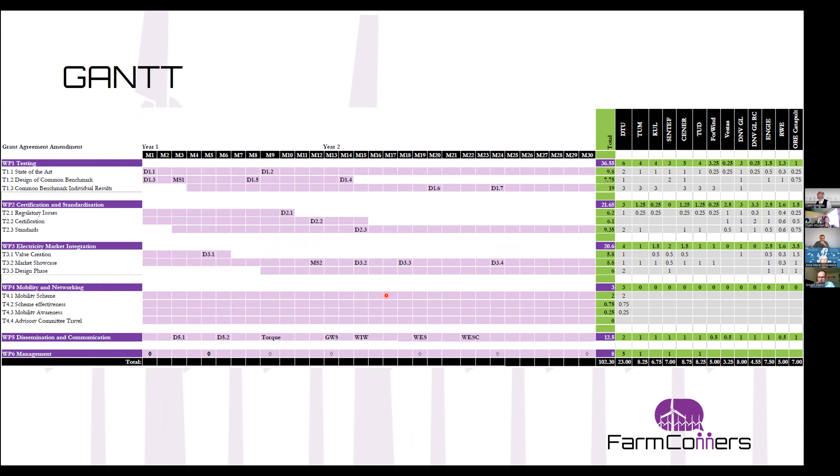And the first contract amendment had some extra tasks, but we already discussed those earlier. So we had this kind of a final Gantt chart, and what you can see is that here at the very end of the project, we really don't have that many deliverables. I think we pushed out one or two of the deliverables to the very end, and we'll be hearing more about that in the near future.

So the narrative at the beginning was that wind farm control had been a research focus for a long time, and we've been trying to discuss how to actually get that a bit more into the market and how to pave the way for wind farm control, and how to also have some particular wordings a bit more defined that we didn't really have in the beginning.

So we had most of the people we knew that had been doing wind farm control in the past. We also had some advisory committee that we, in the end, really didn't use too much, except we invited them to the meetings that, as you know, weren't really that easily possible anymore after the start, which is obviously a shame for something that is a project that is determined or is made to actually convene people and to talk to people.

We had this layout of tasks and work packages, and the promise was that we came from a relatively low TRL to wind farm control at TRL 7. Whether that actually was true or not can be discussed later on in the final discussion.

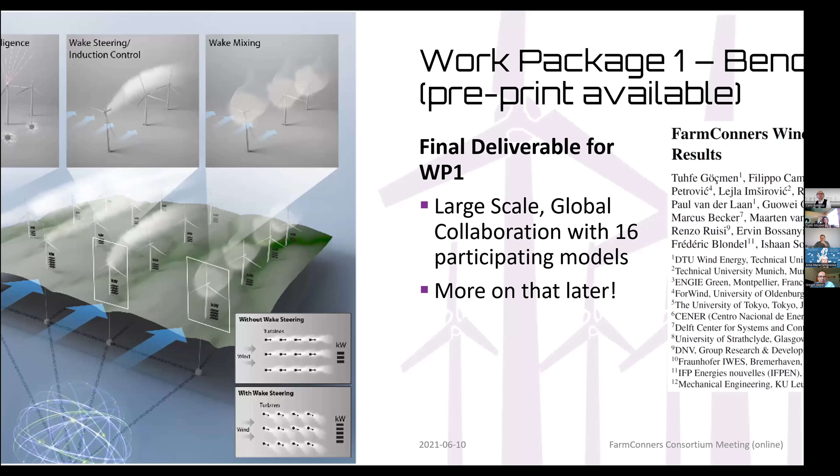There's also the benchmark results where we have a preprint available, and that's also a final deliverable for work package 1. Again, those are all teaser slides and shall be discussed in much more detail later on.

We also had certification and standardization already in Outlook, which I think is a bit of the way towards the higher TRLs, to be known that we already have some products and some ways to certify those products.

And there's also the market showcases that obviously are some of the particular activities that we did in FarmConners. One of the things coming up is also this open access controller and the wind farm, looking into how to do the flow control and the power plant control together.

And as an outlook, as I said, FarmConners is not the end of the line, it's not the end of everything. Wind farm control is a big topic and will only grow in importance in the future.

And one of the things that is coming up now is the Awaken project in the US. It's notionally the largest ever project on measuring flow in wind farms and in large wind farms. And they also have a wind farm control component.

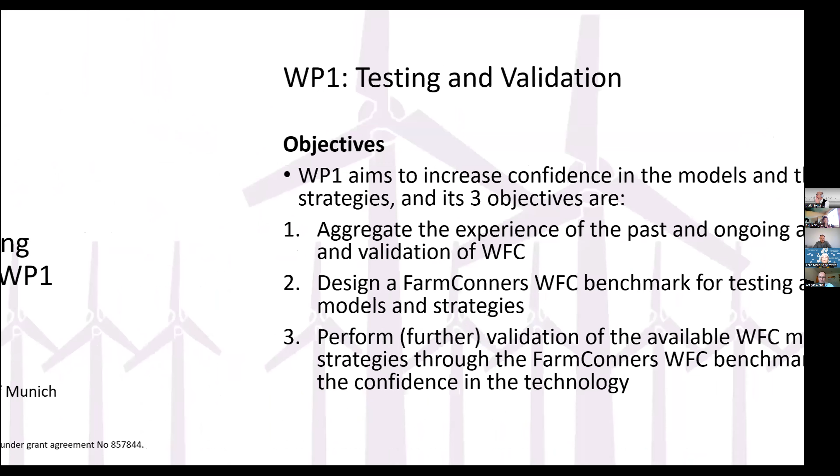I would like to give a short update on the overall outcomes of the work package, and then we will look at the results for the benchmark. So just to summarize, these are the objectives of work package 1. The overall objective was to increase confidence in the models and in the control strategies, and we identified three objectives: aggregate the experience of past and ongoing activities concerning the testing and validation of WindFarm control strategies, design a benchmark, and perform further validation of the available models and strategies through the benchmark so as to increase confidence in the technology.

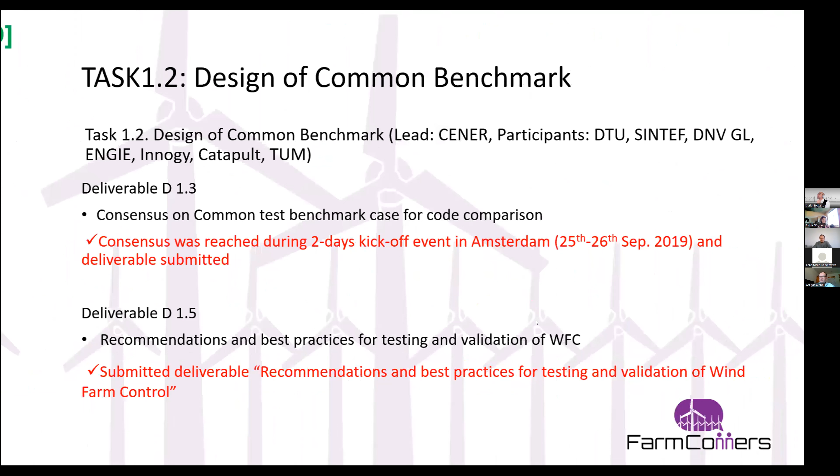We defined several tasks. The first was establishing the present state of the art in WindFarm control testing and validation, with two deliverables: a workshop, and an analysis of the research gap published in a paper presented at TORQUE 2020. Then the second task was designing a common benchmark. First we had to reach a consensus among us, among the consortium, and that was also a deliverable, along with recommendations and best practices for testing and validating WindFarm control strategies.

We then launched the common test benchmark. This was done via a webinar. It was supposed to also be presented at TORQUE live, but due to the pandemic, since TORQUE was postponed and then went all online, in the end we decided to anticipate the launch of the FarmConners benchmark through a webinar. The overall goal of the benchmark has been described in the paper published at TORQUE 2020.

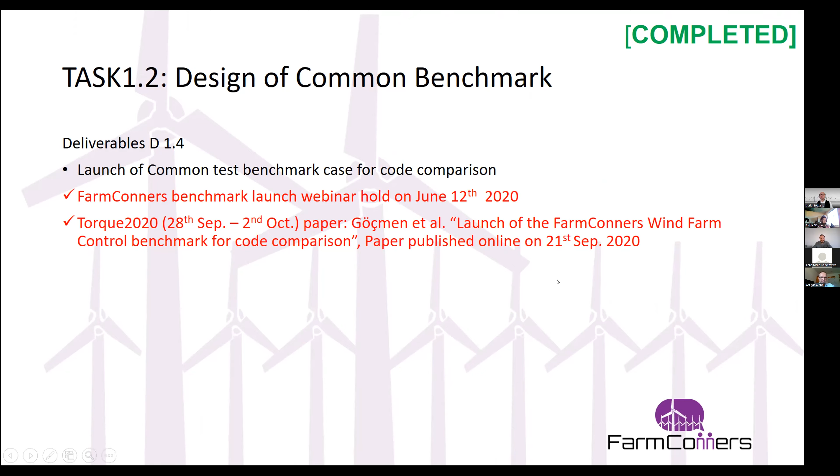Finally, the last task was the benchmark itself. What we wanted to do was validate models against the FarmConners database, which consists of high fidelity simulations, wind tunnel experiments, and field tests. We wanted to use the database to quantify and reduce model uncertainties, and we expected to see a convergence toward those wind farm control methods whose benefit can be relied upon based on model predictions. Finally, we wanted to present the results in a journal paper to be submitted to Wind Energy Science.

Indeed, we had three benchmarks within our common benchmark: one based on a synthetic data set, large eddy simulations generated within two European projects, TotalControl and CL-WindCon. Then we had a wind tunnel data set benchmark, based on wind tunnel experiments conducted during the CL-WindCon project. And finally a field data set, coming from field experiments. In this case, we used data gathered within the framework of the SMARTEOLE project, a project funded by the French government.

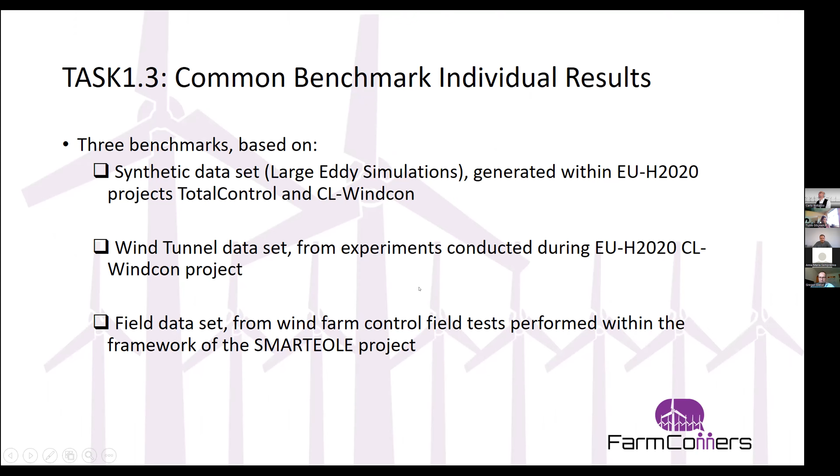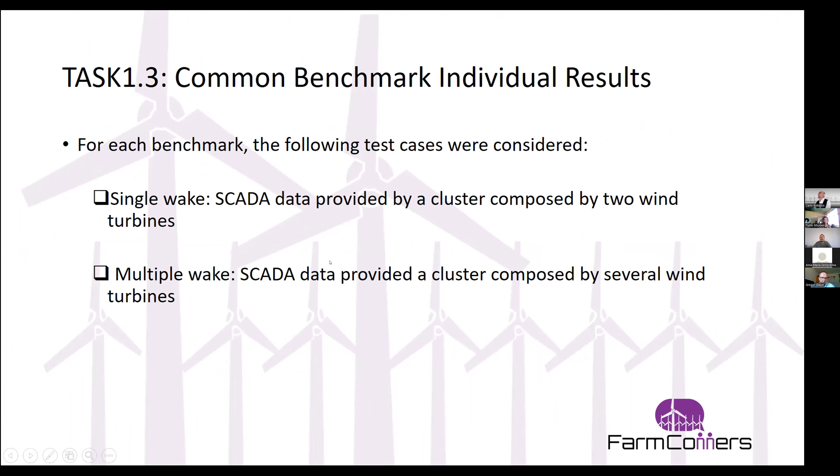For each of these 3 benchmarks, we consider 2 cases: single wake and multiple wake. Single wake basically uses SCADA data provided by a cluster composed of 2 wind turbines, and multiple wake is SCADA data provided by a cluster composed of several wind turbines.

In total, 13 participants submitted results. 5 participants worked on the field data set, 4 participants on the LES-based data set generated in CL-Windcon, 5 participants on the LES-based data set generated in Total Control, and 2 participants for the wind tunnel data set.

Some results were presented first at the Wind Energy Science Conference of 2021, again online in this case, and this is also deliverable 1.6. Finally, we had deliverable 1.7, about publication of the results from all 3 benchmarks I just talked about, in a journal paper.

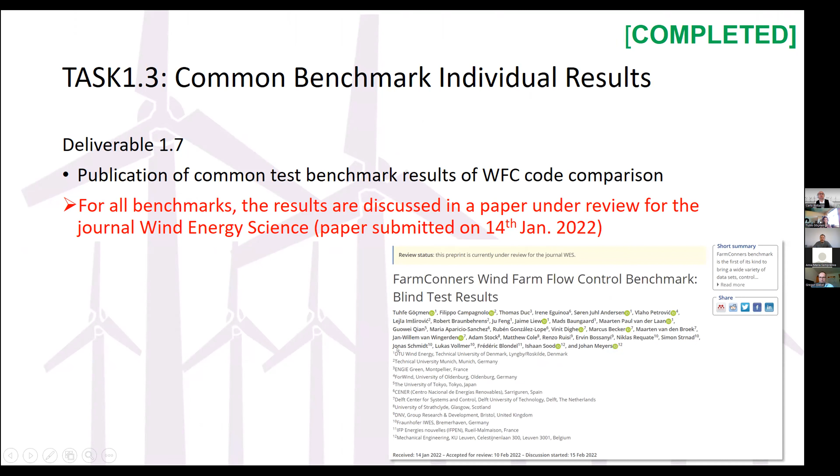We submitted a paper to the journal Wind Energy Science. The submission was on January 14th of this year, and now the review process has started. We expect it will be reviewed in the forthcoming future, and hopefully finally published in a matter of a few months.

Finally, last summer some tasks were added to the project, also to work package 1, as the entire project was extended, and the task that was added is task 1.4. It is about prospects and challenges of wind farm flow control. For this task, the goal was to write the review paper that Gregor just spoke about.

It's a paper composed of 55 pages, 6 sections, more than 300 references. It's currently out for friendly reviews, but it is expected that it will be submitted again to Wind Energy Science in a matter of a few days.

So this is just an overview of the objectives, results, and deliverables pertaining to work package 1. Now I would like to invite Tuhfe and Thomas to also provide more information about the benchmark results. Specifically, Tuhfe will talk about the benchmark results based on LES data, and Thomas the benchmark results based on the field data, while at the end I will also present benchmark results based on wind tunnel data.

So I don't know who, Tuhfe and Thomas, who wants to start first. Feel free. I don't know, field tests are always more interesting. Thomas, would you like to give it a go first? I can go first. Yeah, thank you.

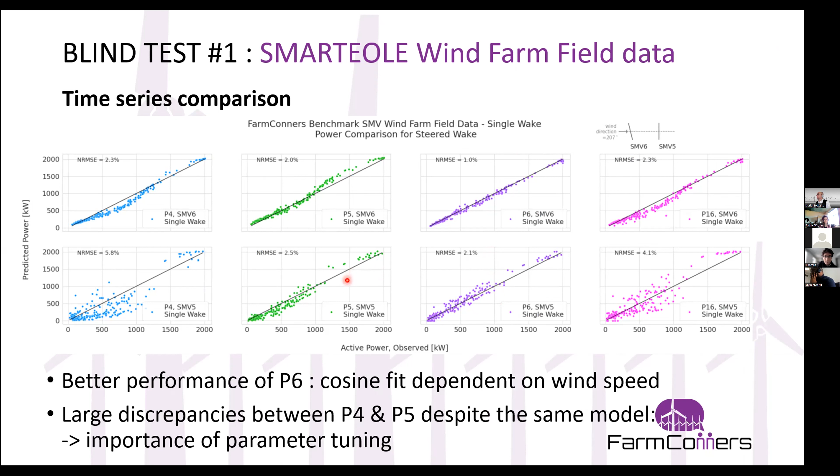P6 is also the one that behaves best at the downstream turbine, but P5 is also doing quite a good job.

Now, talking about the evaluation of the different models: we had these two sectors defined for multiple and single wake. I'm going to discuss only the single wake cases. The pre-processing of the SCADA data was a bit difficult, mostly because, since this is field test results, we do not have a reference signal as the atmospheric condition is changing constantly.

So we had to use the SMV7 power as the reference signal, since this is the only turbine not affected by the wake steering. Although this turbine is very close to a forest, and therefore the wind that arrives at SMV7 is not exactly the same as the wind that SMV6 experiences for the full wake condition considered in this exercise, we had to apply some recalibration on the SMV7 power signal so that it could be used as a proxy for SMV6 during the wake steering exercise.

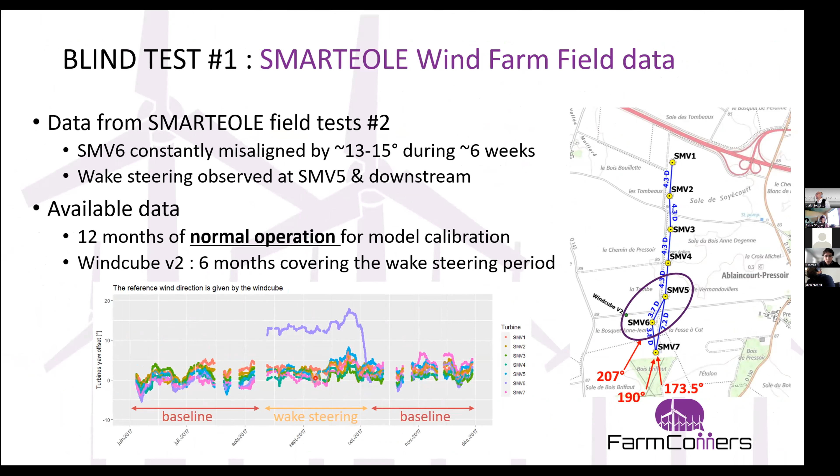The second problem with this field test is that we didn't have any toggling between the wake steering and baseline periods, so we had to use a baseline period that was both before and after the wake steering period, and therefore there might be slightly different atmospheric conditions on average between the controlled and baseline periods. We tried to make sure these differences were not too significant, not preventing the analysis of the results, and we think the way we applied the post-processing was the best approach for analyzing the results.

So we estimate the results using the energy ratio methodology that was defined by NREL. Basically, you use the reference power signal to normalize both the upstream and the downstream power signal as a function of wind speed and wind direction. That's what you can see here for the single wake case, either as a line plot or box plots for several bins.

In red is the baseline operation, so the baseline wake combined SMV6 and SMV5 power as a function of wind direction. In black is the same, but during the wake steering test. You can see that since the black box here is above the red box, we do have an increase in the combined power production of the turbine.

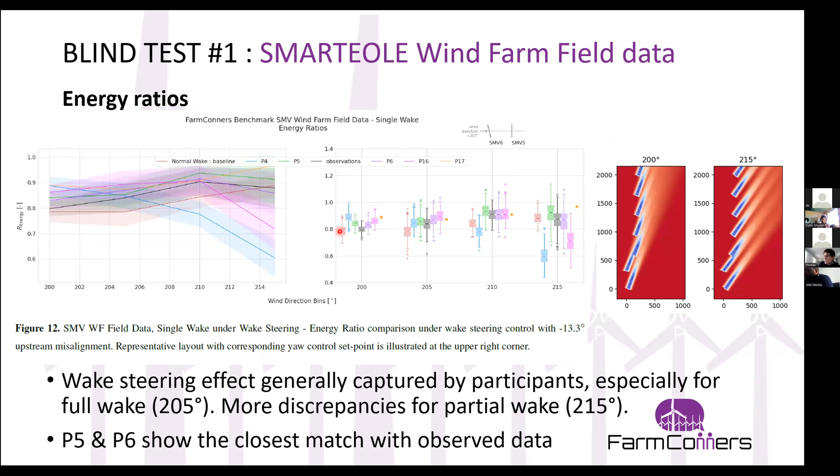Finally, we could also estimate the energy gains. The energy gains are obtained by dividing all those results with respect to the same baseline here in red, and they are also expressed in terms of box plots. The conclusions are more or less the same as the previous graphs. In general, P5 and P6 are the ones most able to capture the energy gains observed on the SCADA data, and P4 shows big losses in power production above 210 degrees.

This is probably because their hypothesis on the yaw loss exponent of the upstream turbine is a bit too high, so there is too much power lost on the upstream turbine, and the downstream gain in their model does not compensate for this loss. On the other hand, for participants who estimated a much lower loss at the upstream turbine, there seems to be much closer results to the actual wake steering case.

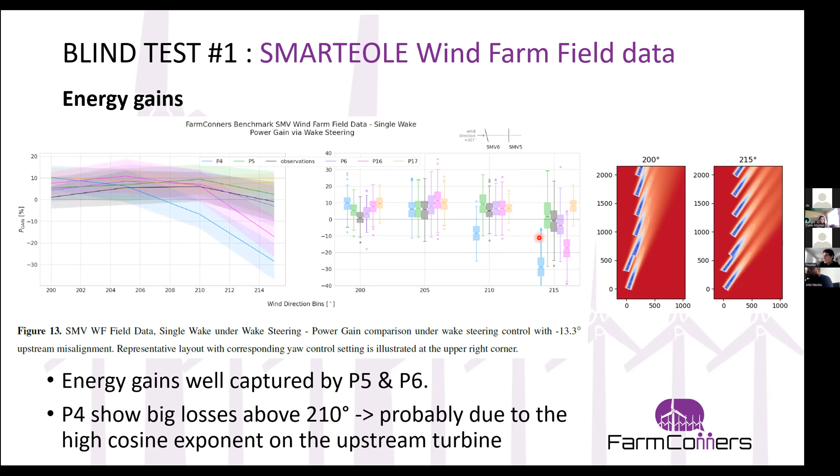So finally, some conclusions from this benchmark exercise, maybe 3 major points we highlight in the paper. First, there is a very high sensitivity to the choice of the model parameters. This can be seen by comparing P4 and P5, who are using exactly the same model but with a different tuning strategy - we observe very different results in the wake prediction. In particular, the yaw loss cosine exponent seems to play a very critical role in this estimation of energy gains, so this might be the parameter that needs to be calibrated the most accurately.

I want to point out that there was no wake steering data to calibrate the models for the participants, and I think this was very problematic for them, because they had to take hypotheses about both the yaw loss cosine exponent and the wake deflection model. Some of the participants did a great job calibrating those models without wake steering data, but for others it was more difficult to get good results.

Using these first 2 points, we also concluded that for future field implementation, it would be easier to follow an iterative process, because at the beginning we are forced to use normal operation data to define a first wind farm control strategy, but we have no assurance that this strategy will be the best one. After a few months of wake steering implementation, we could probably update the wake model parameters based on the field data collected, and then adapt and adjust the wind farm control strategy to get to the final and most efficient strategy we can achieve.

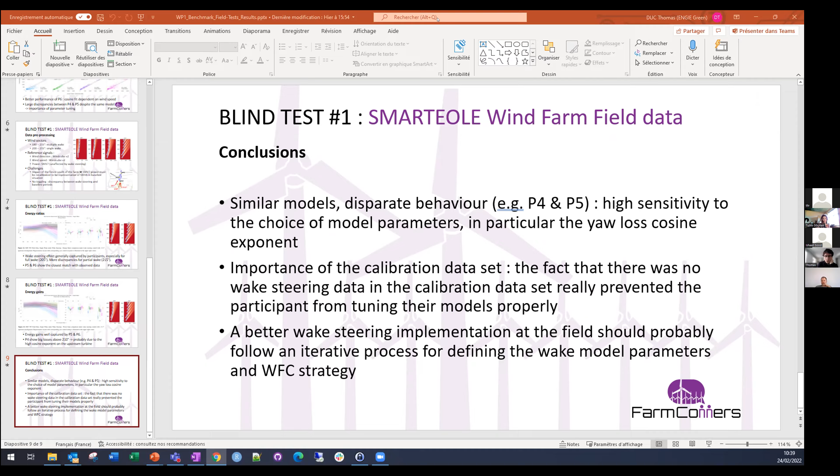Okay. Do you see the screen now? Yes. All right, with the LES blind tests.

Okay, great. Yes, so I'll talk a little bit about the blind tests number 3 and 4, as we named it. Sorry for the voice. We started with the field test Thomas just showed, and then we also had the wind tunnel as the other blind test, and we had two different LES test cases, as Filippo mentioned in the beginning, to do the investigation.

So the LES data set is typically used quite a bit in the literature. And when it comes to TRL, technology readiness levels, it is also seen as an enabler, if not the prerequisite, to have field implementations. The LES itself is still giving us a lot of options to dig deeper in terms of what type of behaviors we see in the wake. And we can also, compared to field implementations, play with the control settings a little bit more, and also do extended analysis, especially for the tools that are coupled with aeroelastic tools.

However, here we are looking only at the power performances for both CL-Windcon and TotalControl LES cases. They're produced with different large eddy simulation toolboxes, different CFD solvers, and they also have different attributes. I think they both had very valuable contributions to the overall benchmark, but they're also looking at different parts of wind farm flow control.

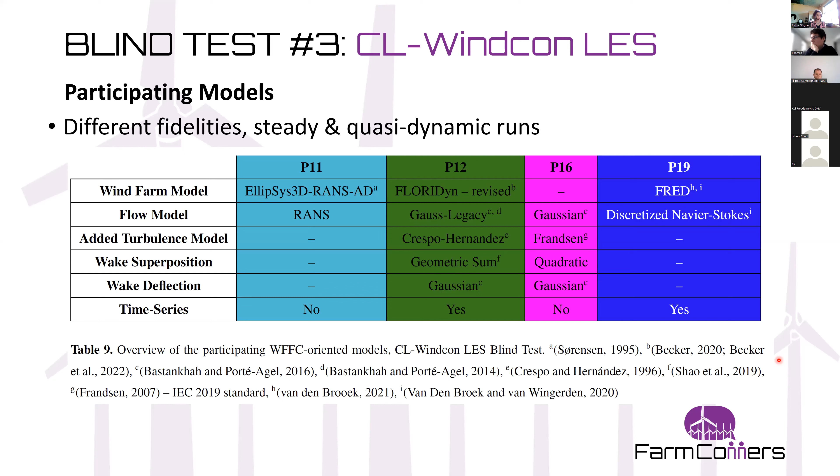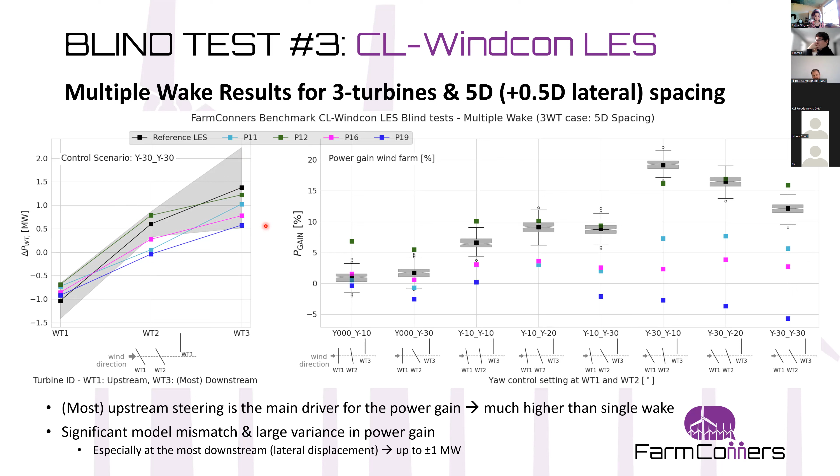And then the downstream turbines are misaligned for 10, 20, 30 degrees. So the distribution of the downstream misalignment is changing. Here is the same for the second turbines, but the first turbines are minus 30 degree misaligned. And here there is no misalignment at the downstream turbines at all.

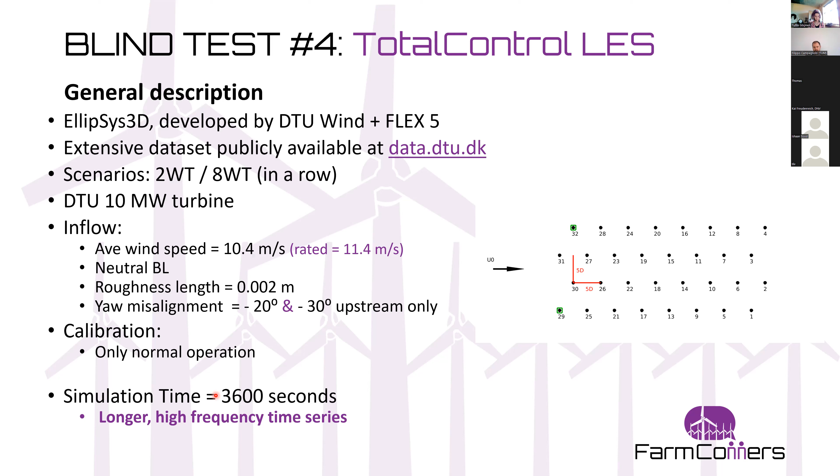So looking at the results, especially in the dynamics and the correlations, are quite interesting.

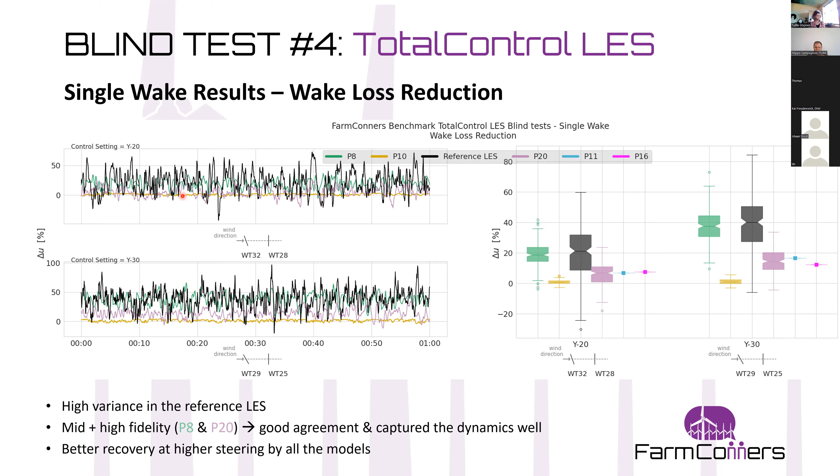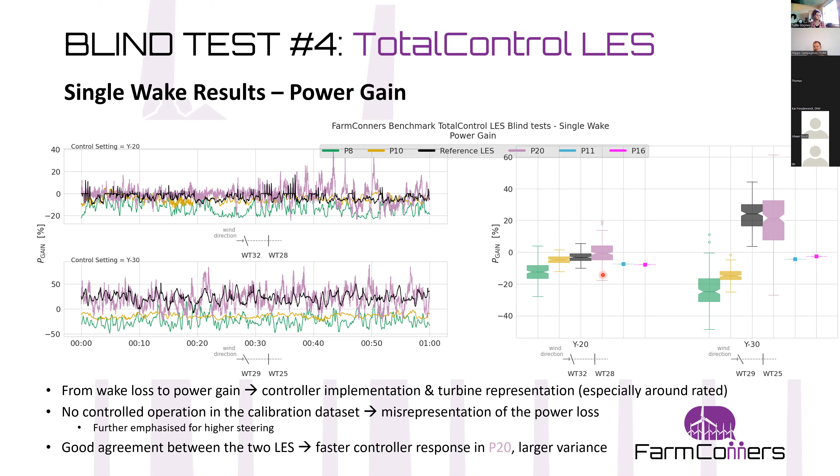For all the analysis and further description of the participants and everything, feel free to have a look at our preprint, currently under discussion in Wind Energy Science, but you can read the whole PDF already. It would be great if you can leave comments over there—we will certainly take them into consideration in the revision phase. Thanks a lot, let me know if you have any questions.

Thank you, Tuhfe. There is indeed a comment in the chat. Can you read it? Let me see if I can see it.

Given by Soren: the overestimation of the wake can also be due to not properly capturing the variation of the thrust coefficient when the turbine is yawed. Indeed, oh yeah, a combination of these effects. Definitely, it certainly can be the effect. It's just that the misrepresentation or underrepresentation of deflection was already proven for the models we were looking at. But it's a fair point that the CT behavior is also changing for the steered turbine, and maybe there's underestimation of CT, just like the power loss factor—it needs calibration as well. Very good point, we can perhaps add that in the discussion, in the revision of the paper.

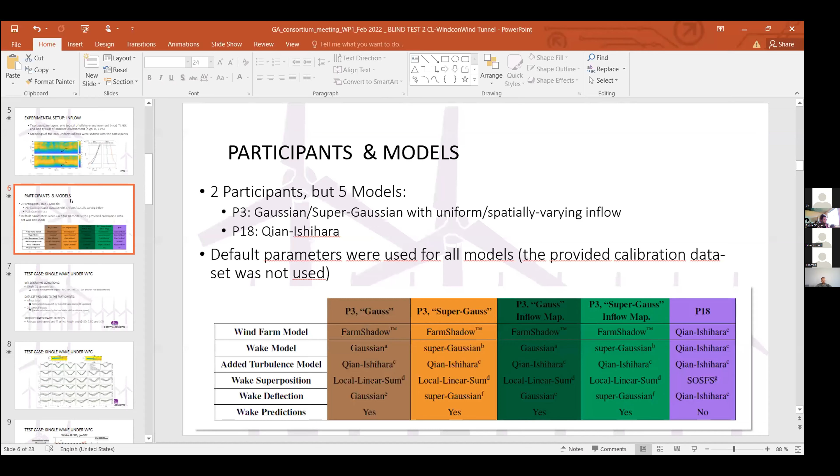Okay, so the last benchmark, I would also like to mention this point. The last benchmark made use of experimental data coming from a wind tunnel. These data were gathered during the CL WindCon project, and the wind tunnel is one of the Polytechnical wind tunnels. We did tests in the upper section here. The Polytechnical wind tunnel is a closed circuit wind tunnel with two test sections. In the upper one, it's possible to reproduce and simulate atmospheric boundary layers, and that's where the tests were performed. It's quite a large wind tunnel, with a test section 14 meters wide and 4 meters high.

In terms of wind turbine models, we used up to three scale wind turbine models named G1s, which have a diameter of 1.1 meters and are fully automated, equipped with individual pitch control, torque control, yaw control, as well as many sensors on board the turbine to measure loads, as well as other quantities like rotational speed, power, pitch angle, and yaw angles.

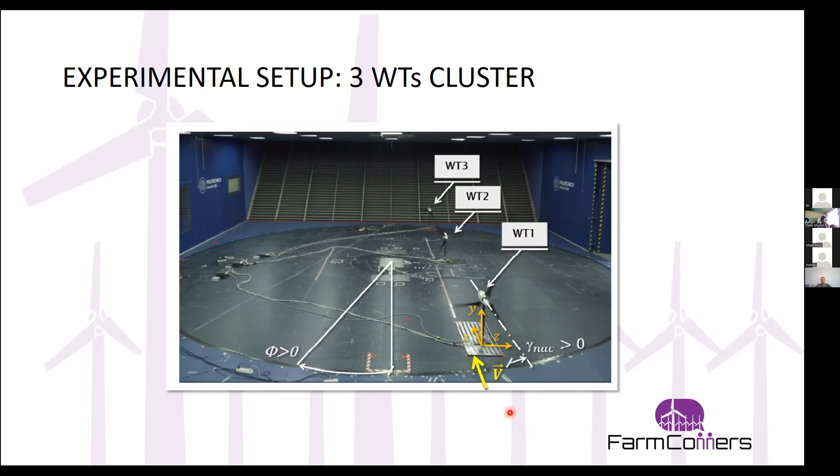It's not visible, but upstream of the cluster we had the pitot tube that, in the end, was like the mast of our cluster, so it was providing the measured wind speed.

In terms of inflows, we performed tests simulating two different boundary layers: one typical of offshore environments, with a turbulence of 6%, and the other of onshore environments, with 13%. We mapped the flow on a vertical plane upstream of the cluster for both inflows.

Here you see a distribution of the longitudinal speed, normalized with respect to the speed measured by the pitot, located here. You see that the flow is clearly non-uniform, not only along the vertical direction, because we have a vertical shear as shown here, but also a little bit along the lateral direction.

This is just due to the presence of obstacles at the inlet that are not uniformly distributed, or rather the fact that the wind tunnel is equipped with 14 fans. There are supporting structures here at the inlet, supporting a net or even a heat exchanger. All these elements make the inflow non-uniform, also in the lateral direction.

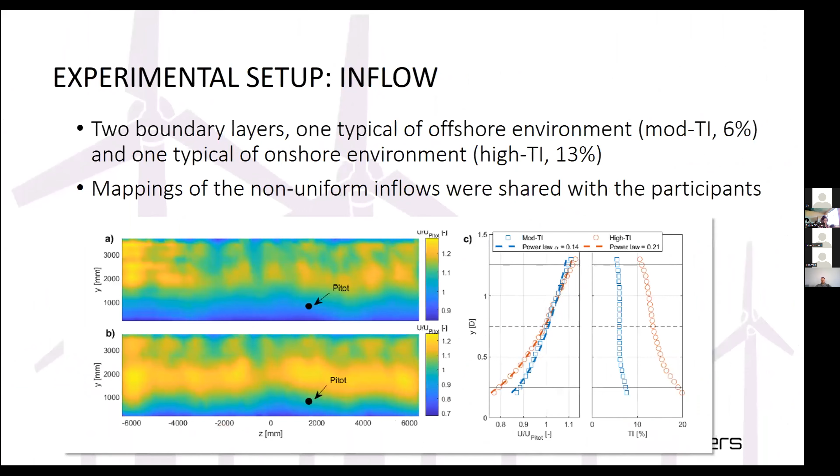These mappings were provided also to the participants. We had two participants only. However, one participant used 4 different models.

Participant 3 used either a Gaussian or super Gaussian wake model, with uniform or spatially varying inflow. With uniform inflow, the assumption was that the inflow was on average uniform on the entire section, while spatially varying inflow means the inflow was considered non-uniform also in the vertical and lateral direction, as you can see here, for the participant's 3 different models.

Participant 18 used only one model, based on the Qian-Ishihara wake model. Here is a detail of the models that were used. In all cases, the wake was assumed to have a Gaussian shape.

What's also important to stress is that despite a calibration data set being provided, it was not used. Indeed, all participants decided to use the default parameters, those available in the literature and the references where the models are described.

As we said before, we had 2 test cases, one single wake, the other multiple wake. For the single wake case, we gave participants data measured while testing a single G1 turbine operating at 6 different yaw misalignment angles, from -40 to 40, for both inflows.

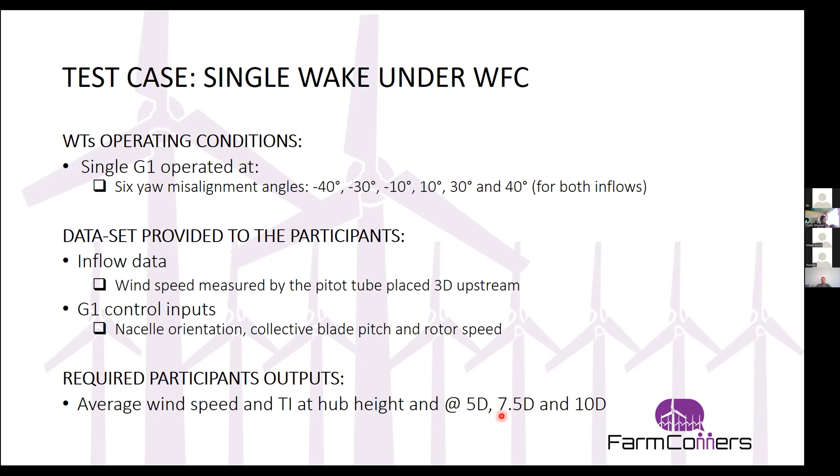The data given to participants were simply the wind speed measured by the pitot tube placed upstream of the turbine, and the G1 control inputs: nacelle orientation, collective blade pitch, and rotor speed. Participants were required to provide average wind speed and turbulence intensity at several locations at hub height and at 3 different distances downstream of the rotor.

We measured the wake shed by the G1s for different inflows, at different distances from the turbine and for different misalignments, and then compared measurements against prediction. This figure shows all the measurements we had, along with the predictions given to us by the participants.

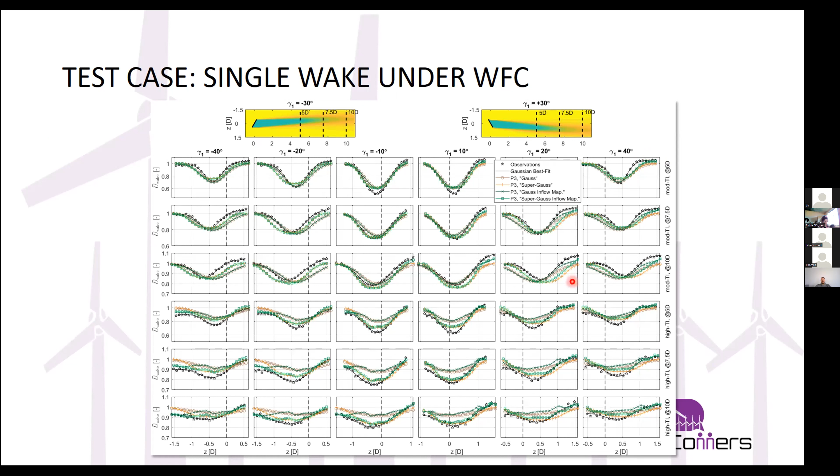What I want to say about this picture is that we also best fitted every measured or predicted profile of the wake at hub height with a Gaussian curve, shown here. The black stars are the measured data, and the black line passing through them is the best fitting Gaussian curve.

With these best fitted Gaussian curves, we were able to estimate wake width, wake deficit, and wake center position, which allowed us to compare such features of the measured wake and the predicted wake. Here you see a picture showing all the quantities.

We can focus first on the wake deficit. Generally, as you can see, it's quite well captured, especially by the super Gaussian models—these two lines here, green with squares, and brown, or orange, with crosses. Generally there is a well captured trend, especially for high turbulence intensity, no matter the yaw misalignment; the trend is very well captured.

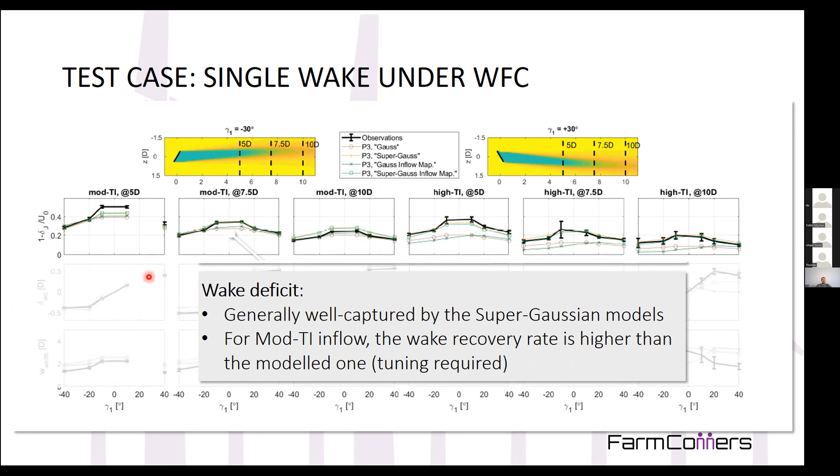For moderate TI inflow conditions, so like 6% turbulence, the wake recovery appears to be slightly higher than what has been modeled. The wake deficit is reducing as we look at different distances downstream. The observed wake deficit is reducing quicker than what has been predicted by the models, which clearly indicates that the wake recovery rate could have been tuned according to the provided calibration dataset.

If we look at the wake center position, overall we see a generally very well captured trend, especially by the super Gaussian models. The observed wake center position, shown in black lines, quite overlaps well with the green line with square marks, or the orange line with cross marks, which are really overlapping quite well.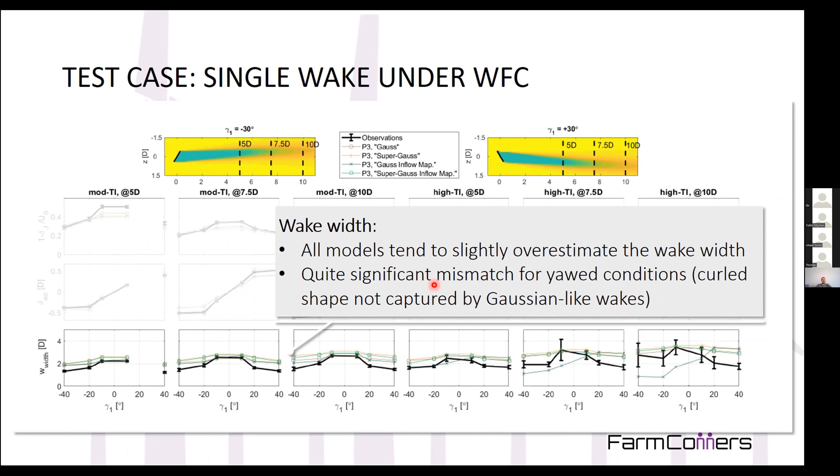When it comes to the wake width, all models tend to slightly overestimate it, and the mismatch is quite significant for yaw conditions. Whenever we look at high yaw misalignment, minus or plus 40 degrees, the measured wake width is much smaller than that of the predicted wake profiles. We trace this back to the fact that all models assume a Gaussian-like shape of the wake, and so are not capable of capturing the typical shape of the wake when a turbine is yawed. Such shape is closer to a kidney shape, so called the curled shape, and this could be one of the reasons, especially at hub height, why the predicted wake was characterized by a bigger width than what was observed.

Then we looked at multiple wake cases; here is the list of tests conducted. Concerning the multiple wake case, we tested with two aligned G1s, perfectly aligned one after the other, with a spacing of 5 diameters. We looked at two different operating conditions: first, where both turbines are operated misaligned at an angle of 30 degrees, and second, where just the upstream turbine is operated misaligned at 30 degrees, with the second one kept aligned to the wind direction.

Another case was two turbines laterally spaced by 0.5 diameter, again with two cases: one where the downstream turbine is yawed, and the other where the upstream turbine is yawed. Finally, we also had data from experiments conducted with 3 turbines aligned, 0.6 diameter laterally spaced, and here we tested 25 different combinations of yaw misalignment for the 2 upstream turbines, while the third one was always kept aligned.

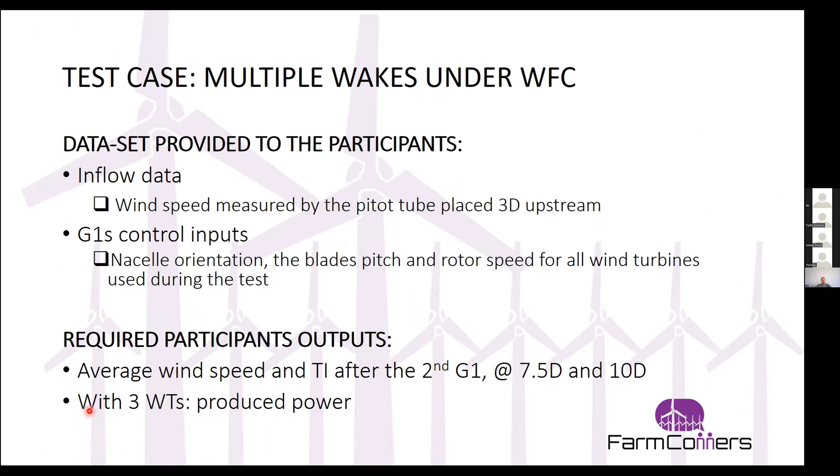Looking at the case when both turbines operated misaligned, we can see generally a quite good trend between measured and predicted wake, especially when the super Gaussian model is used and when the non-uniformity of the inflow is considered. The match between measured and predicted quantity is quite satisfactory.

On the other side, when only the upstream turbine was yawed and the downstream one was not, we see a relatively poor match, no matter which model is used, especially at hub height but also at other locations. Generally speaking, the match is not as satisfactory as was observed when looking at the wake shed by a single turbine, or as was observed in the previous case when both turbines were operated misaligned.

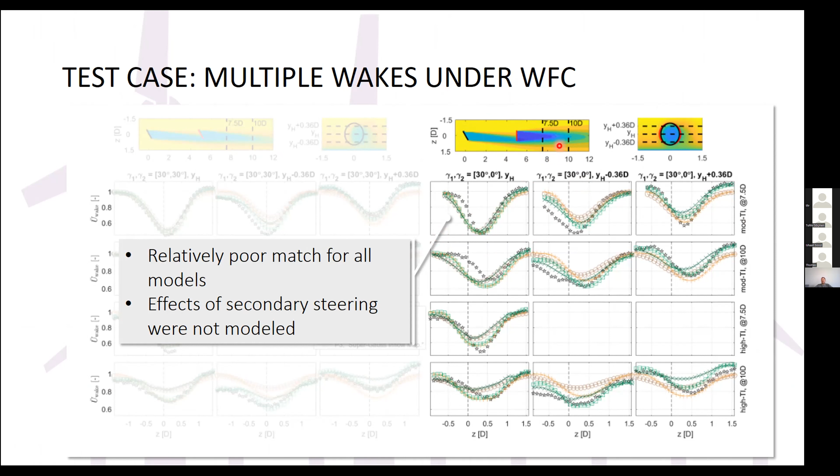We thought one of the reasons could be that the models didn't account for secondary steering effects. This can produce quite some effect, as despite the second turbine not being operated at misaligned condition, the yaw misalignment of the upstream turbine could still affect the wake shed by the second turbine, leading to a lateral displacement of that wake. Similar conclusions were observed in the other case when looking at second turbine lateral displacement of half diameter.

Here, in this case, only the downstream turbine was yawed, and in another case only the first turbine was yawed. When only the downstream turbine was yawed and the upstream one was not, there is quite a good match, especially when considering the super Gaussian wake model and accounting for inflow non-uniformities. Instead, when only the upstream turbine was yawed and the downstream turbine was not, there is quite strong mismatch between predictions and measurements, which again can be explained by the lack of modeling of secondary steering effects.

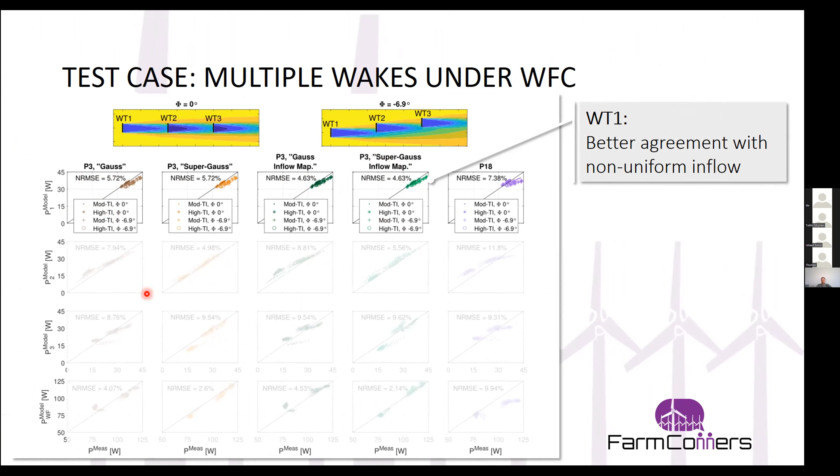Looking at the first turbine, the plot also reports the normalized root mean square error. As can be seen, when using inflow mapping, accounting for inflow non-uniformity, we get better agreement between measured and predicted power for the upstream turbine. For the second turbine, the best predictions were again observed with the super Gaussian model, as shown by this error.

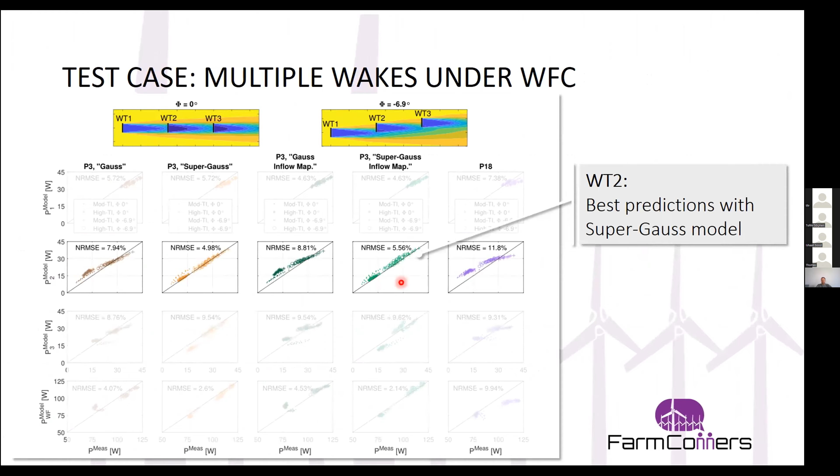The comparison is quite satisfactory overall. For the third turbine, in many cases the produced power is underestimated, so models tend to underestimate the power produced by the third turbine. Specifically, the biggest mismatch was observed for moderate turbulence intensity and full wake conditions. This indicates that whenever there is a strong wake-to-turbine interaction, with a strong deficit and downstream turbines fully immersed in the wake shed by the upstream turbine, we see the major mismatch between measurements and predictions.

There is not a clear trend for which model performed better. However, overall, when looking at the cluster, the discrepancies were lower than what was observed at turbine level, which is quite interesting—despite differences at turbine level, the differences between measurements and predictions at cluster level reduced substantially, giving a normalized root mean square error of just 2%. The super Gauss model provided the best accurate prediction, also when accounting for inflow non-uniformities.

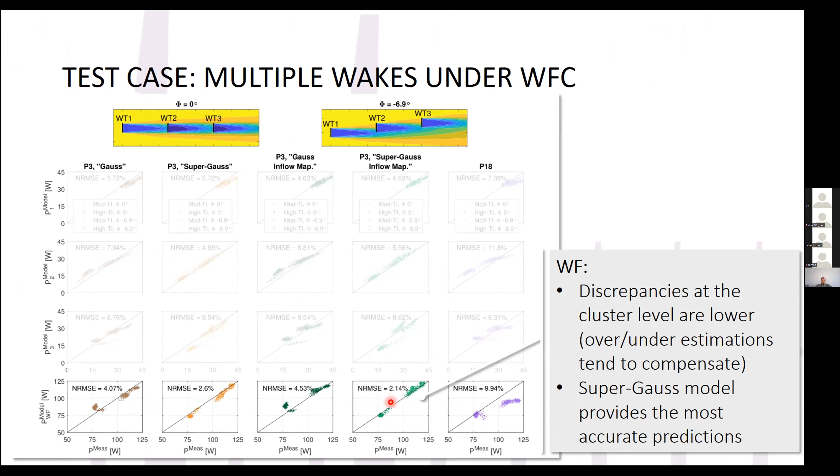Looking at the power gains, as expected, we see the highest gains in partial wake conditions, when turbines are laterally displaced. Lower gains are observed when turbines are fully aligned, so fully in the wake, with downstream turbines fully immersed in the wake shed by the upstream turbines.

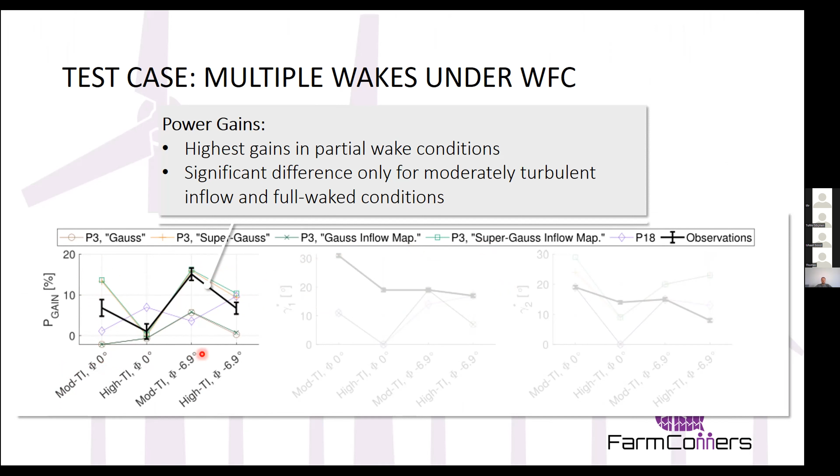So the models overpredicted the gain that can be achieved by steering the turbines if the turbines are all aligned and the turbulence intensity is quite moderate. However, there is quite a good match.

Concerning the yaw misalignment, the optimal yaw misalignment, this is also quite interesting, because the optimal yaw misalignment of the upstream turbine that maximized the power output was very well predicted by the super Gaussian models for the upstream turbine. You don't see it, but the lines are exactly overlapping, they're all on top of each other.

For the downstream turbine instead, it's a different story. So all models tend to, on average, overpredict the optimal yaw misalignment for the second turbine. Indeed, as can be observed based on measured quantity, the optimal yaw misalignment for the downstream turbine should be lower than the optimal yaw misalignment for the upstream turbine. However, such trend was not really captured properly by the models.

And again, this can be due to secondary steering effects that the models did not account for. So to conclude, we say that we had quite reasonable predictions, despite none of the models being ad hoc calibrated. There was margin for calibration, as has been shown. So we can expect that if the models were calibrated using the calibration data set that was given, prediction could have been even better.

What we saw is that the wake modeling can be improved. So we should think about modeling the wake so as to capture its characteristic curled shape. As we saw before, just when looking at the wake shed by a single turbine, the wake width in misaligned conditions was not properly modeled, was not properly estimated or predicted by the models. And also we can think about accounting for the effects caused by secondary steering.

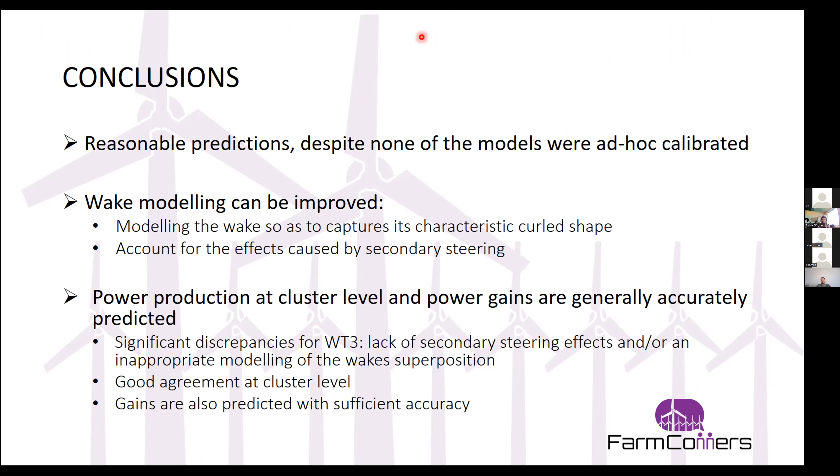All right, shall we conclude work package 1 then? Yes, I think we're already late, so sorry, we should go on. It's all right, we have quite a buffer for this in the calendar, so no worries.

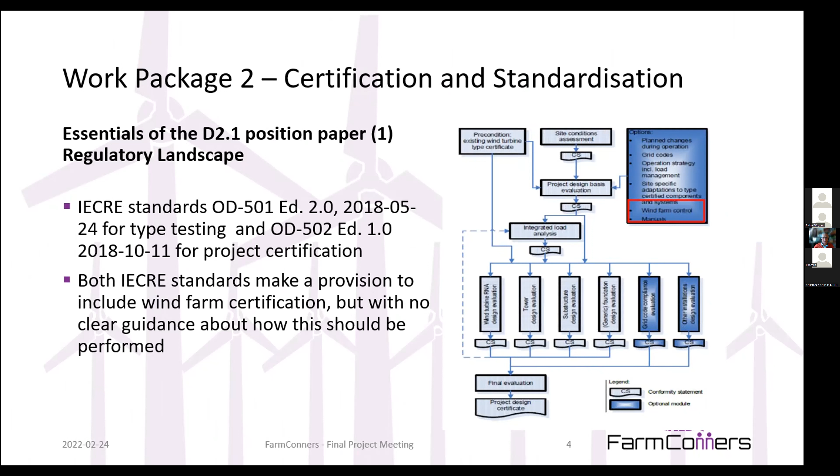This is the IECRE scheme for certification of wind turbines, OD 501 and OD 502. And right now there is no clear description in this international wind turbine standard on certification of wind farm control - it is just mentioned in a side note.

And there is the DNV standard for certification of wind turbines. We have several standards for onshore wind turbines, offshore certification, project certification, and floating wind certification. And herein there was an update in 2020 where wind farm control has been mentioned in the project certification.

So basically the offshore wind farm certification, where a site-specific design assessment should be updated if you include post-installation wind farm control into your software, into your farm management, or if you would plan wind farm control right from the beginning before the installation in the planning. And the basic approach mentioned there was, because of the many uncertainties in the effects of wind farm control, to require a measurement campaign on the individual wind farm to confirm that the loads do not exceed the ones that have been assumed for standard operation in the wind turbines.

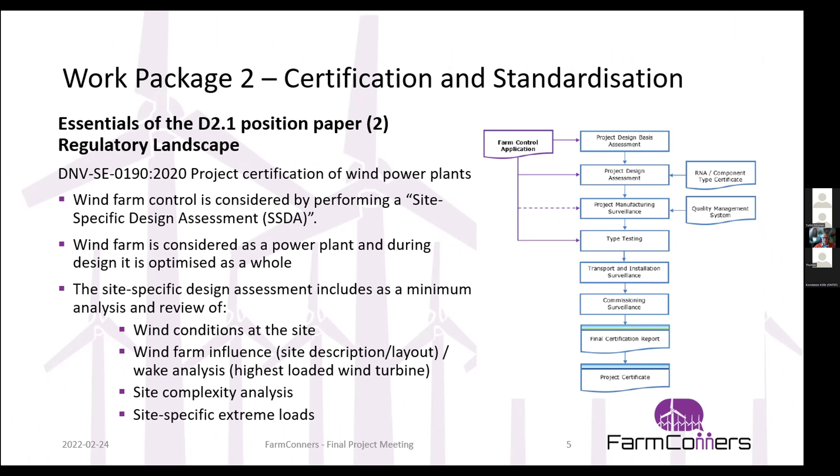But right now, as we know, we have these uncertainties in the prediction of effects - we somehow have to mitigate those uncertainties. Here's again the list of standards that are relevant for wind farm control, mentioned in our position paper, deliverable 2.1. And I jump now to the current deliverable, which is in the very finalization phase, and I'm really happy to complete this now.

We have given a look to the grid operations requirements, because site certification typically covers the wind farm up to the grid connection point. But on the grid connection point, there is another certification type active. This is the grid code compliance, which is often separated, but somehow we have maybe here a link in certification of those two certification schemes. This is expressed in section 2.

In section 3, we have analyzed the load effects on turbine level, and I will show you right now the results we have made together with TU Munich, Filippo and Helena Canet. And we have explained the new methodologies of LongSim, the simulation tool. I will not go into details in this today. And we have made recommendations how to certify those effects, wind farm control strategies in the future.

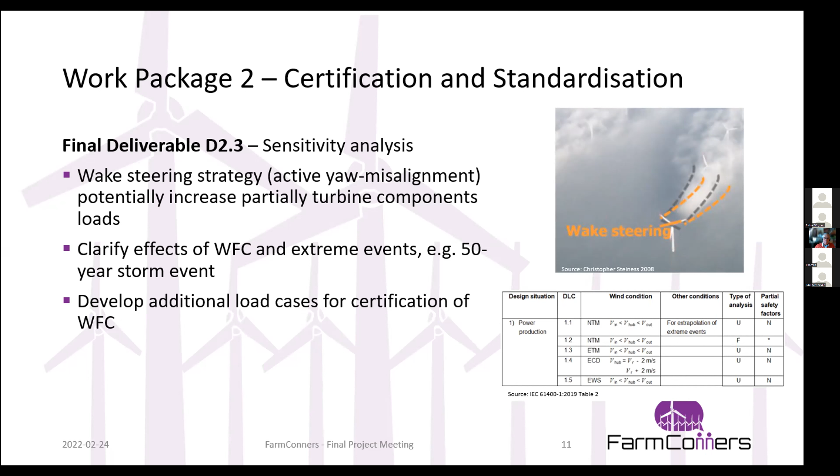So the probability is realistic that wake steering plus an extreme event occurs somehow during the lifetime of a wind turbine. And therefore we have those load cases we simulate, which have been validated in the past for the individual turbines on and offshore. And those are the load case group 1 during power production, 1.1, 1.3, 1.4, and 1.5 have been considered in this sensitivity study with TU Munich together.

So we look at normal operation, we look at extreme turbulence, we look at extreme wind direction changes. And by the way, we had a nice storm last weekend here in northern Germany, I think in Denmark too. In my neighborhood, a number of large trees were fallen, and we had strong direction changes and gusts during this storm.

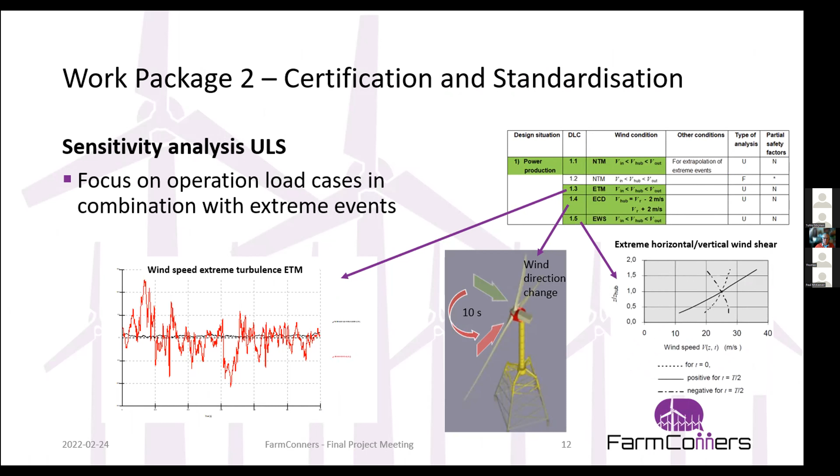And those are the situations that are simulated in those load cases: extreme wind shear, extreme direction change, extreme turbulence. And this has been combined with yaw misalignments up to 38 degrees, because typically yaw misalignments or wake steering strategies range from 20 to 30 degrees. And we considered a yaw error, a measurement error of plus or minus 8 degrees, which is also in the standards. So we come up to 38 degrees yaw misalignment.

Here you see the 4 load cases considered, and each of those load cases had about 3,000 load case variations. So quite a number of turbulence simulations. And we have done those simulations with 3 turbines, all reference public domain available turbines. You have to say that those turbines all have very simple control algorithms and maybe are not 100% comparable to the state-of-the-art large wind turbines with very sophisticated controllers.

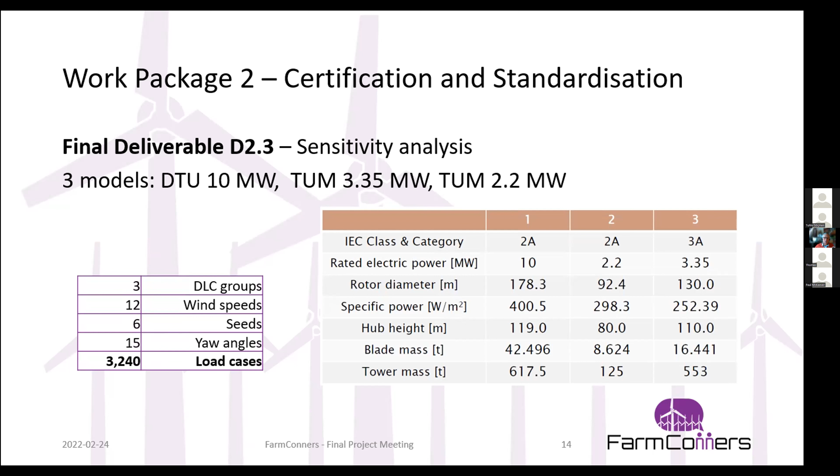However, this study had the intention to show qualitatively how extreme events plus yaw misalignment behaves and how this relates to normal operation, just wind aligned with the rotor axis. We have made those simulations with 2 different codes to have a scatter here also in the simulation tool. As I said, the idea was just to give a qualitative impression how wake steering, how yaw misalignment could affect the load picture. And here you see how the deviations of the models have been in terms of flexibility and eigenfrequencies. They have matched quite well, I can say.

One comment to the models is, of course, that they both used a very similar BEM simulation, blade element momentum approach, which has restrictions, limitations at the simulations of those high yaw angles. However, we have said that the qualitative result is sufficient here, and we can apply this BEM method in this yaw consideration.

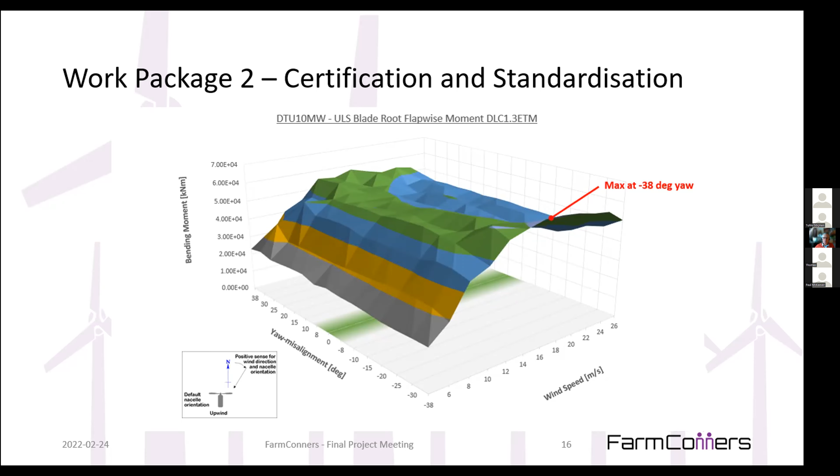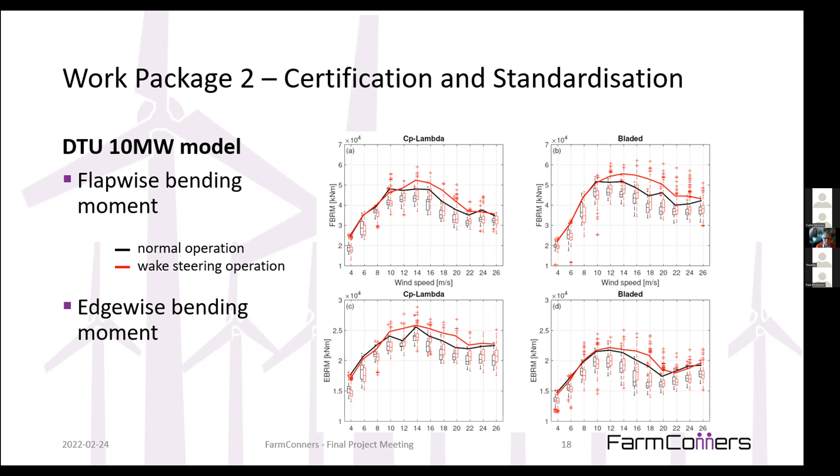What you can see here for the blade root, for example blade flap moment and blade edgewise moment, is that there is a clear increase of the ULS loads above rated wind speed, basically. There are some cases in the range of rated wind speed where it starts, but it's definitely in all simulations above rated wind speed that we have increases of blade root loads.

The same situation can be seen for the tip to tower clearance, so for the blade bending, which is basically related to the figures we have seen before. So the tip to tower clearance for high wind speeds and high yaw angles becomes a critical situation. And for the tower bottom bending moment, we can see not this obvious picture, but also in certain wind speeds load increases.

This analysis led us to the question, or to the consideration, what would we do if we limit the wake steering approach and limit it, for example, just to the operation between partial power mode, so between cut-in and rated wind speed. And if we would cut out yaw misalignment above rated wind speed, how this then looks like in the load.

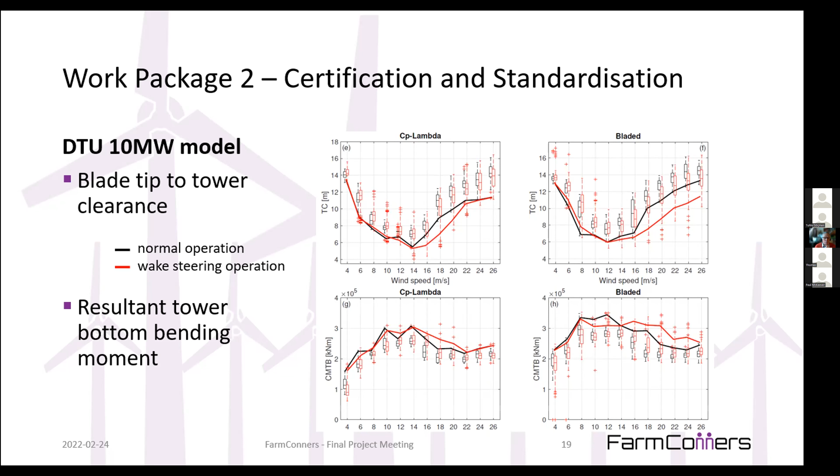Another idea was if we limit the wake steering mode just to certain degrees of angles, so maybe only up to 20 degrees yaw misalignment, which then gives you a lower effect in wake steering, but you might prevent higher loads.

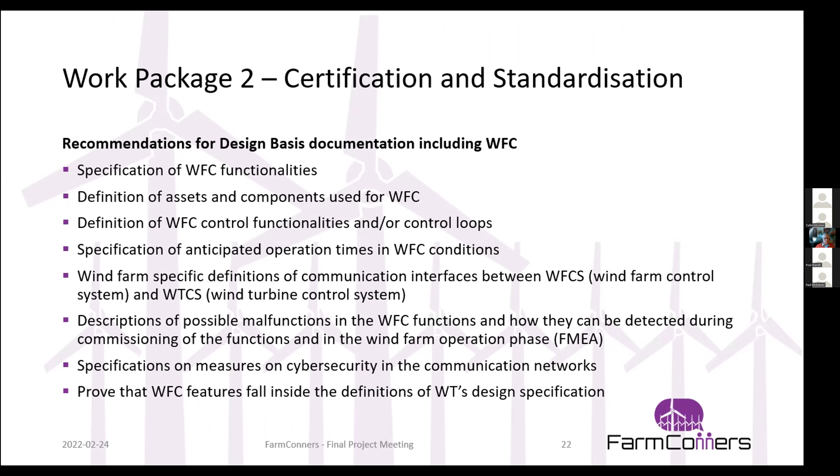Then we would like to make recommendations for the performance of the site-specific design assessment—the check of the situation at a specific site with a specific wind direction and wind distribution.

And we would like to introduce an updated independent load analysis considering the wind farm control effects, as we have done in the sensitivity study—looking at those yaw angles, operation modes combined with extreme events, and also on the fatigue side, the hours of operation in certain modes and how this impacts fatigue, as well as the load reduction effects you could expect, for example from wake steering for the row behind. Those should be analyzed.

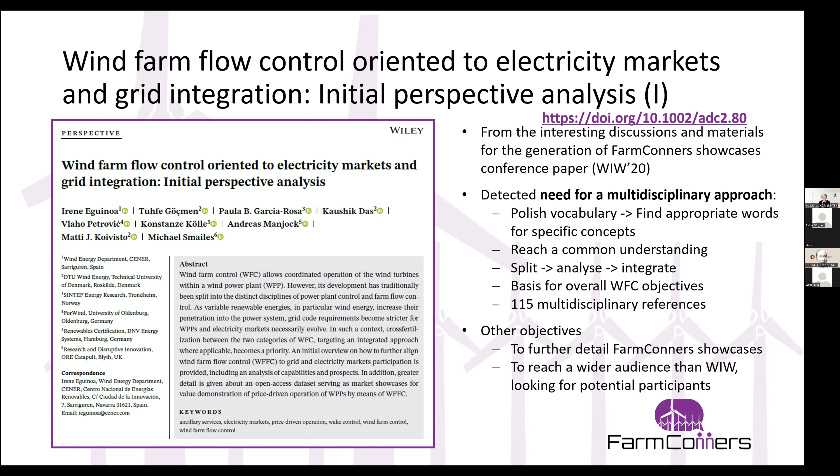Next please. One of the first points we found quite difficult was how to refer to the approaches that were already in the literature, since in some references we were finding wind farm control used either for the electrical side or for the flow side. We came up with this suggestion.

It's always open to discussion for the community, but one we found quite useful: using wind farm control as an umbrella term for the integrated control for wind farms, where we already have quite mature wind power plant control from the electrical side, and the new wind farm flow control which is in a less mature stage, that needs to be integrated into existing controls.

Okay, next please. A way of starting such a discussion, as Konstanze was saying, the work package objectives on how to provide services to the grid and how flow control can contribute to that. We made an overview of electricity markets and ancillary services so that we could use more rigorously the vocabulary and concepts that people from this field already use.

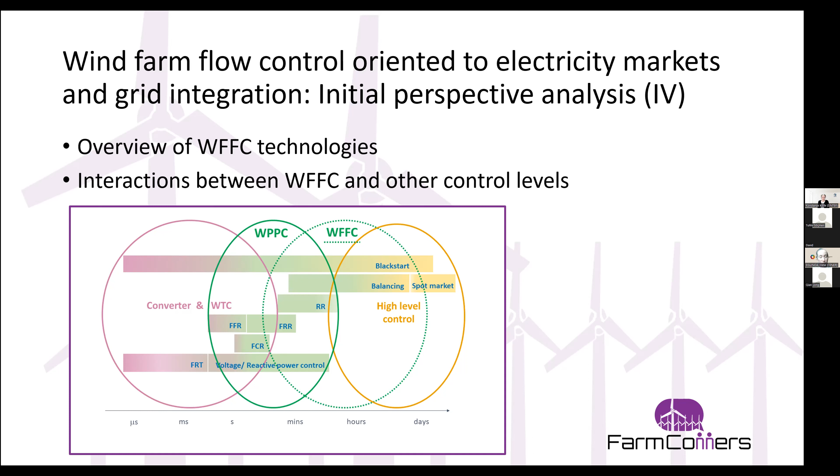Next, we made an overview of the capabilities that the flow control could provide for grid and electricity markets participation, and raised some challenges that could be there if the flow control wanted to provide a higher added value. There was also a quite interesting section on certification of wind farm flow control.

This was prior to all the work in work package 2 for the final deliverable that Andreas was presenting before. Some analysis was made on how the communication is quite relevant - the communication of the farm flow control with the turbine safety system, which is at the utmost priority on how to maintain the integrity of the asset. Then load effects on turbine level due to farm flow control, which is more completed by the deliverable in work package 2, and some mention of how the certification of grid stabilization requirements is done so far and how it should be considered.

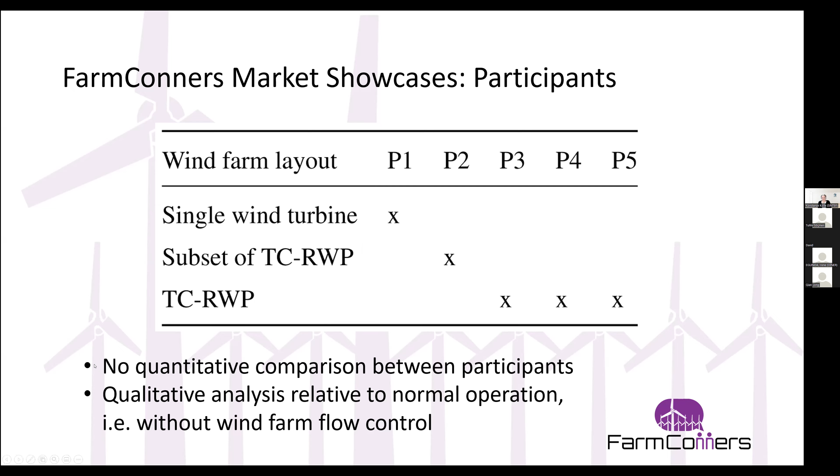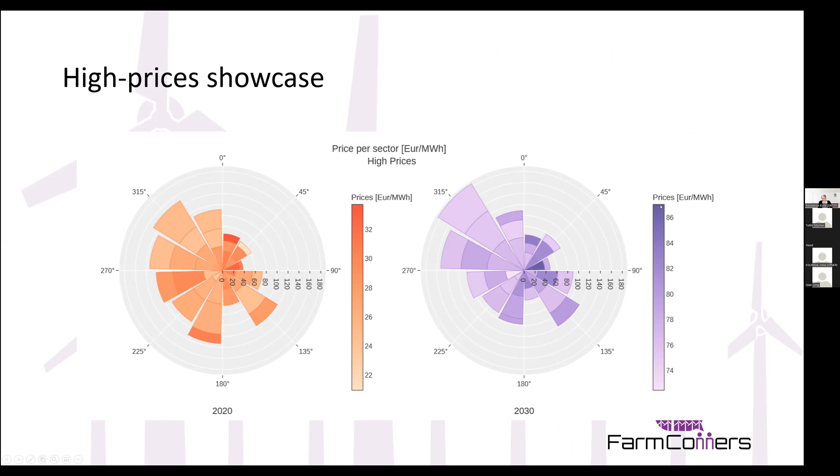As you can see, there are some similarities related to the number of samples per bin, but the prices differ. For example, looking at the Western wind inflow, we have higher prices in the 2020 scenario than in 2030. I have to say relatively higher, because the prices for 2030 are in total higher in these showcases.

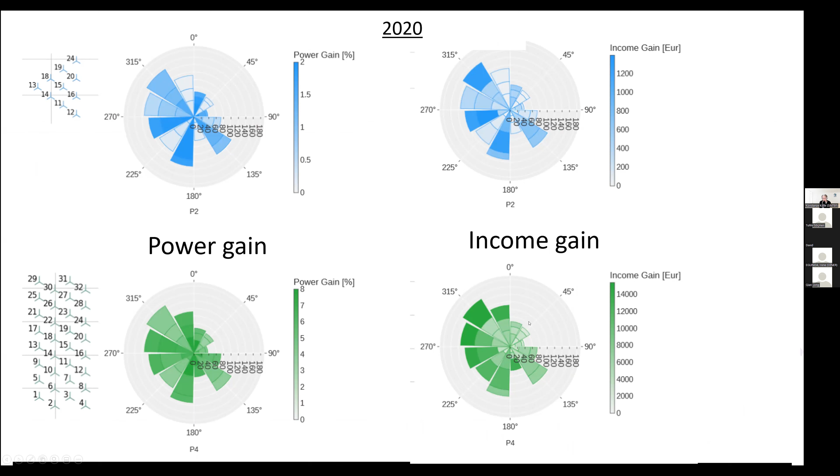Another thing we looked at was the income gain per turbine. Here you see for each participant one bar for each of the turbines, but I'll just show some examples. For wind turbine 1, two of the participants had negative income gains, and this turbine was placed at the outer edge of the wind farm. Similarly, the smaller wind farm that had no turbine 1 had a negative income for wind turbine 13.

When we also take into account the wind price rose for the same year, we see that there are many bins with wind directions from the west, so these are often the turbines that are in the first row.

So there the control strategies decided to change the operation of those turbines in a way that the other turbines will gain more income, so that in total there was a higher income gain.

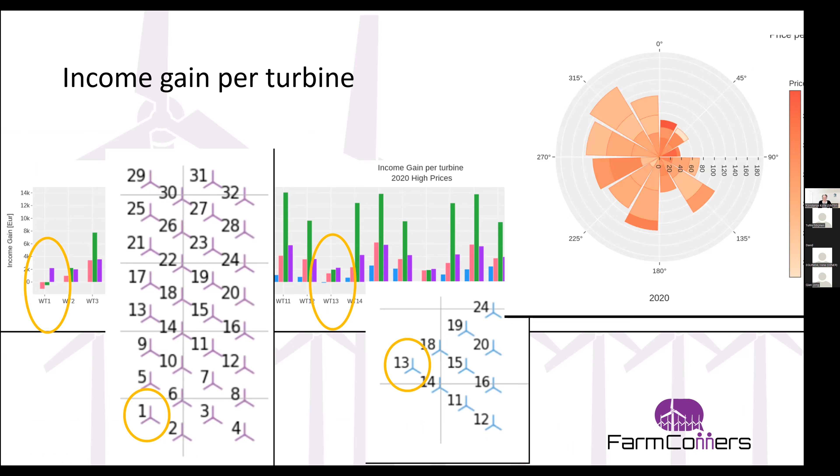That's what I decided to show you. Just to conclude, it seems that maximizing power is not necessarily the same as maximizing income. Since this was the first study of its kind, we suggest it should be further investigated how electricity prices should or could be considered in wind farm control and operation.

Another point is that we had no participants for the other two showcase sets we defined, the low prices one and the one driven by the transmission system operator. For the low prices case, we required a load neutral setup, so the same loads should be kept or reduced. It might be that there's no good way to include structural loads in the control objectives, so this is a research gap. Also for the transmission system operator case, we defined a power reference.

I'd also say that wind farm flow control research hasn't looked so much into reference tracking. I'm not sure if there are questions about the showcases.

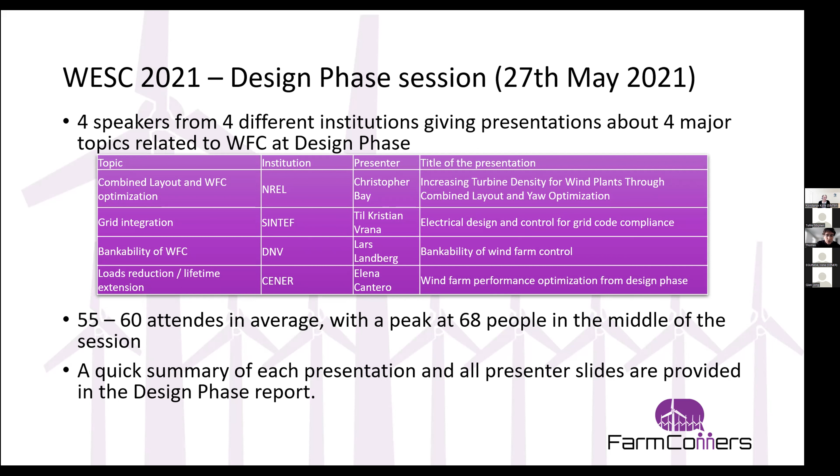On average we had 55 to 60 people attending the session, with a peak of 68 people in the middle. The report gives a quick summary of each presentation, and all presenter slides are attached to the report.

As a conclusion, during this task we first had the opportunity to discuss the benefits of wind farm control in the design phase. This topic is seen to be very large, with many different themes that can be discussed and related to it. We only discussed four of them briefly, but there are many more that could also be discussed, and I think more work and research will be expected in the future on this topic, which will just gain importance in the upcoming years.

Thank you, Thomas. I think that's something to look forward to for everyone. I guess there are no questions, or do you want to surprise us?

I do have a comment, not really a question, just to support Thomas' argument that we will see more in the future. In the Grand Challenges paper, part of Work Package 1, we have a whole section dedicated to the co-design process that looks at the design phase, layout optimization, etc. One of the things, together with the market showcases, when we had the subset of the wind farm versus 32 turbine layout, is that the higher the wake losses, the higher the gain overall in terms of income expected from wind farm flow control.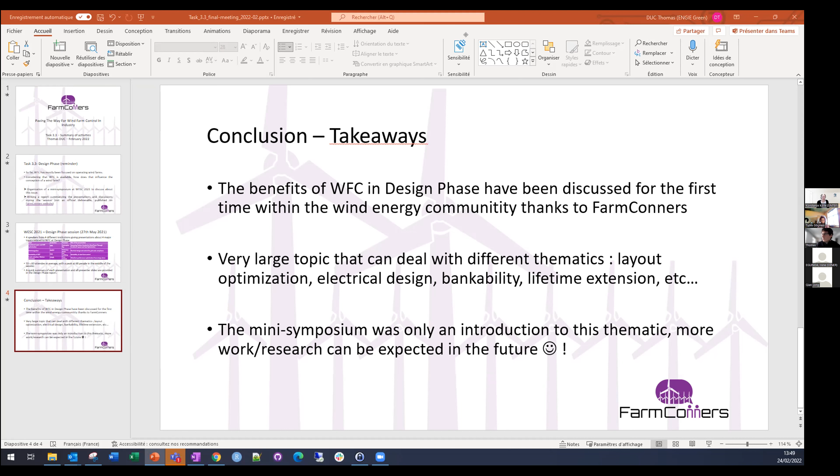Thanks for the addition. That also shows how well interconnected the FarmConners packages are.

Okay, the next part will be presented by Thanasis, who led the simulation model of task 3.4, the additional task of the work package.

And yes, we can see your slides. Let me change to the correct screen. I hope you can see my full screen now.

Yes, perfect. So we were given this task about development of a Simulink-based framework for the integration of wind farm control. There were a few people involved from TU Delft and TU Munich, and it was a very interesting interaction.

So the overview of the task: you have been introduced to work package 3 and its targets. Deliverable 3.5 is what we're focusing on here - this is the integrated wind farm control and wind power plant controller framework. The requirement was that it should be open source first of all, and it should be in MATLAB Simulink, due to industrial practices and modularity.

At least two reasons motivate this, apart from investigating wind farm flow control: most flow control related studies usually disregard both realistic wind turbine control operation and interactions, but also wind power plant electrical control aspects, or active power control aspects. On the other hand, most wind power plant control studies usually disregard farm flow. For realistic implementation, both of these interactions need to be integrated within the same framework.

In order to test this model - though that's not the target of developing the model - we had to integrate a flow model. TU Munich worked on that and integrated a version of FLORIS in a simplified way to be able to run the model with the flow. Zooming in on the wind turbine controller part, what we have here is a pretty simple representation of turbines.

Of course, it's just a 1 degree of freedom drivetrain model that depends on the integral inertia. And then the CP, CT values are a function of distributed pitch angle, but also yaw angle, which are pre-calculated. We tested the model on the IEA 15 megawatt reference wind turbine, a representative large offshore turbine.

The turbine controller part is an as-accurate-as-possible Simulink representation of the DTU wind energy turbine controller. That's an open source controller that's been in Git for many years now, highly validated with a lot of industrial features. This includes derating modes - we have 3 derating modes available - but also an industrial yaw controller with moving average windows and functionality typical in industrial applications.

So the inputs to that block cover the local wind speed and direction for each turbine, and the distributed power set points and yaw set points from the wind farm controller. The output, of course, is the power - both available, calculated, estimated, and measured the actual one - and then CT that goes to the flow model and the individual wind turbine direction.

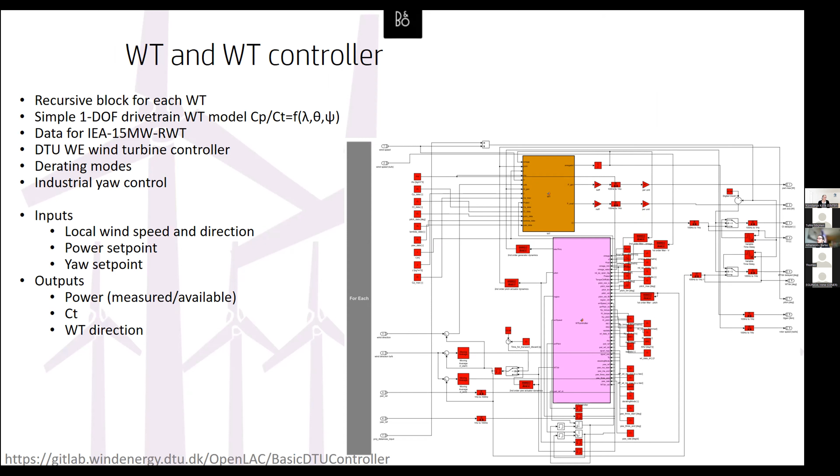As you can see, the model is pretty complicated. Actually, you could say that the wind turbine control block is the most complex of the whole model. The flow part is based on integration of FLORIS with Python, with pretty typical wake models - TU Munich's work on that. You could say it's a pseudo-dynamic implementation because it's actually quasi-steady, not dynamic.

It's called every time step of the wind farm simulation, but there's a simplified wake advection calculation that makes sure the changes are propagated with time accordingly to the downstream turbines. On top of that, there's a very simplified added turbulence fluctuation to, in a simple way, include turbulence on top of the steady state signals.

So the inputs to the module are the ambient inflow wind speed, direction, turbulence, density, the CTs of the individual turbines and their orientation. And of course, the output we get is the local effective wind speeds and directions that are fed back for calculation of the turbine dynamics, but also the projected distances between them, calculated with the flow direction in order to account for the simple wake advection.

On the wind power plant or wind farm controller block, we have a simple collection system where cable losses are calculated. So the measured individual power signals are fed here, and then there's a power plant controller with all the typical operation modes - MPPT for maximal power point tracking, balance modes for a specific setting of production, and delta modes as a function of available power.

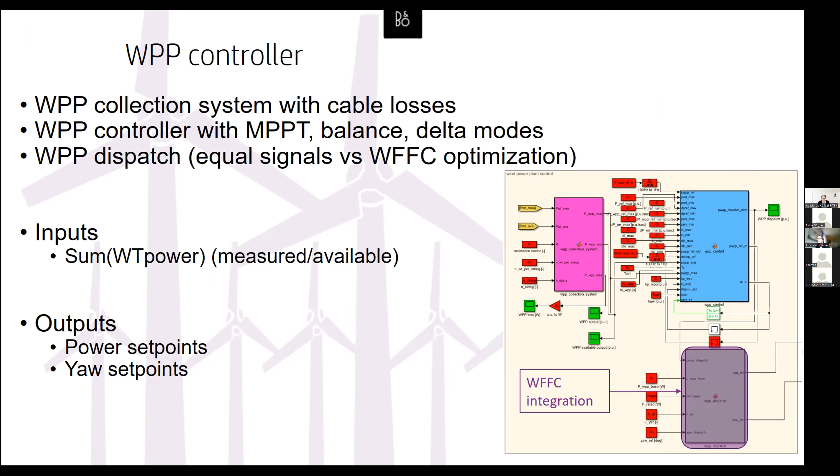And then there's the dispatch, which just sends the global set point and yaw set point signal to the individual turbines. And of course, you can imagine this is exactly where the wind farm flow control integration can take place. So the main outputs are the power set points and yaw set points individually for every turbine.

We have a first test case of the model just to demonstrate some of the aspects we want to see. It's a pretty simplified case, an array of 4 turbines at 5D spacing. The first test case concerns the wind power plant control - so no wind farm flow control settings, just power plant control settings, with and without the flow model.

What we have here is a realistic ambient inflow wind speed, direction, turbulence, density, provided by TU Munich. The specific duration of 2 hours demonstrated here, we made sure that the wind direction is around the full wake - so it's plus 5 degrees from a theoretical full wake direction.

And then we have the 30-minute mode switching. We start from a balance of 0.4 and go to a delta mode of 0.2, and then end up with just MPPT mode after that. So we run this in this complex inflow and see what's happening.

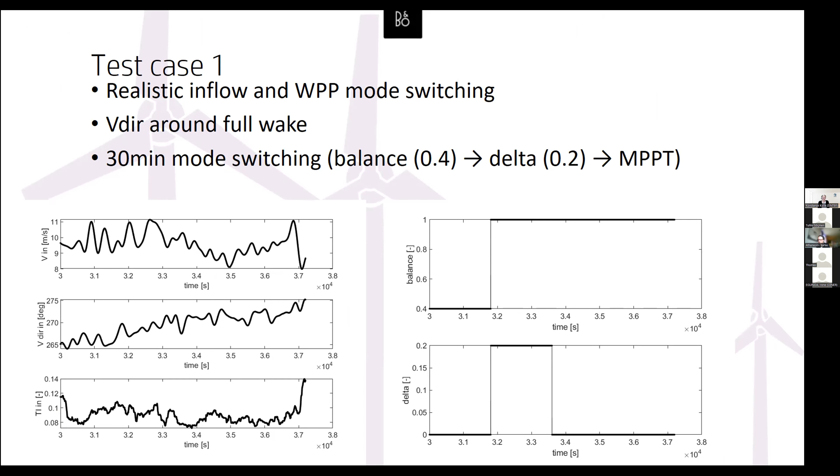For delta and MPPT modes. But of course, it's interesting that since we have all the detailed dynamic simulation of every turbine, you can look at the individual response signals. So we have for each turbine the available power and the measured power.

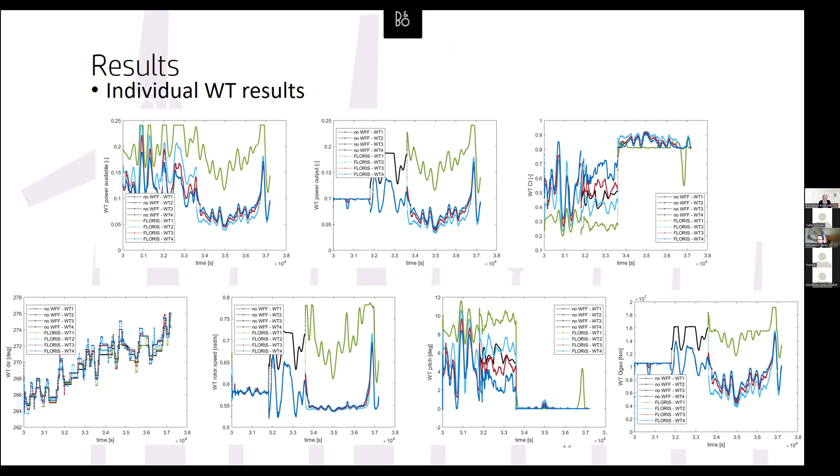But as a second test case, TU Munich ran a realistic inflow, the same data set again, a different segment of that, to focus on wind farm flow control implementation using the same framework. So they offline optimized wind farm direction settings, turbine direction settings, so yaw misalignment settings, using Floris as a function of wind speed, and then for each turbine, and then they implemented that only in MPPT modes.

But yeah, that's it. That's what we try to show with this modular framework is openly available, and we could easily demonstrate the interactions between the different modules and control functions in a dynamic environment. We're trying to finish an article on the model and the test cases right now, and hopefully the model can be utilized in future wind farm control projects, taking into account the integration of all the control modules.

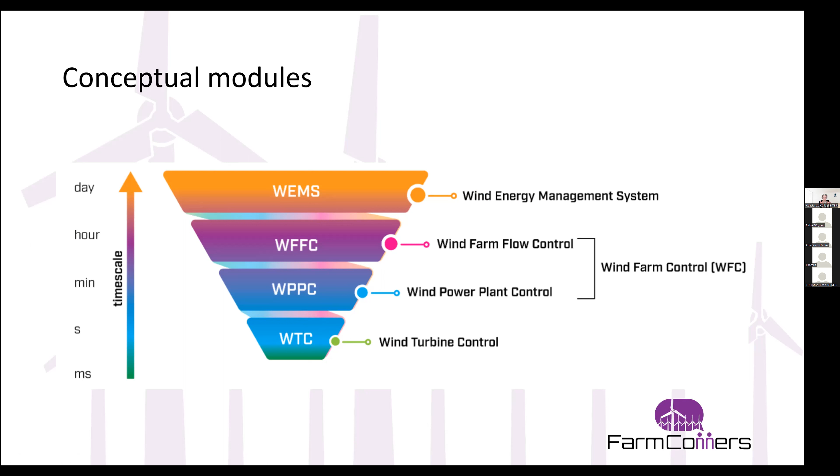In order to look more into the timescales, Irene showed you the figure with the circles, and she also said that there was a lot of information collected in one. Here we tried to separate it into two different figures. So this first illustration shows the control modules and the different timescales, and on the second figure, we defined the timescales of the power system operation.

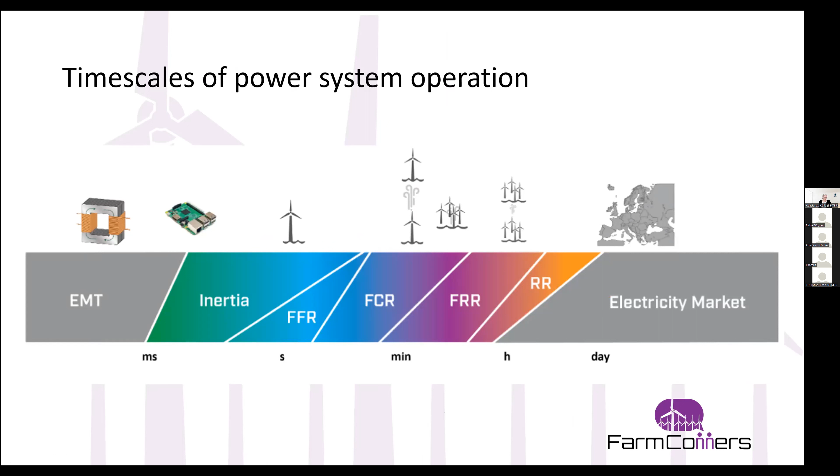So you see here in the middle the frequency reserves that Irene also showed you, on the different timescales. And on top, we indicated different parts of the wind farm or wind energy system, where you can see, for example, the wakes between two turbines occurring at the same timescales, to indicate that there might be something we have to be careful about.

Thanasis showed you the practical implementation of an example for the integration. And in this paper, we identified challenges of integrating the electrical and aerodynamic aspects of wind farm control. Here I just wanted to mention some of the challenges that we discuss in the paper.

One would be the rate of transition and activation, like when do we use wind farm flow control and how do we ensure that it does not interact in a negative sense with the wind power plant control signals.

Then we have the actuators and update rates. We focus in this article on the active power and then the frequency support, but we are not considering voltage control and other things from the electrical side. But for the active power, both for the wind power plant control functions, so the electrical aspects and also the flow aspects, would use the set points of the active power as actuators. And so there the control logic has to ensure that there's no conflict.

And then the integration involves different control objectives. One is, for example, that you have the grid codes and power system services. On the other side, you want to maximize your power or revenue from the flow side, but also maybe at some point include structural load reduction. And there can be contradictions that you have to balance.

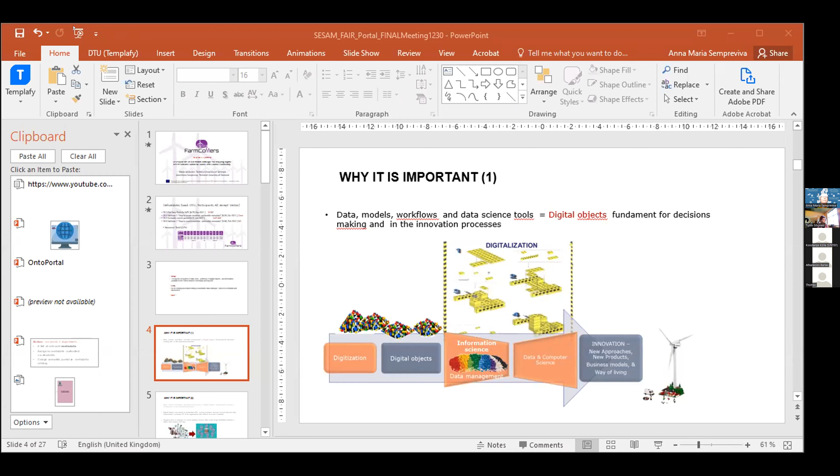Okay, can you see it? We have it, yes, thank you.

Okay, so we were in a way lucky because there was no mobility, and then we could do this task, the development of a metadata catalog for mapping the digital assets available in the farm control community. Well, it was Nicola, Vasilievich, and me on this task, and also other people from other institutions. But unfortunately, or fortunately, depending, Nicola left because he went to Norway. He got a good job proposition and he accepted. And then I left because I'm retired. So, since I very much like this task, I promised Tuhfe to present this, and so I'm here.

The deliverables were this one: 4 FAIR data tools for wind farm control, which were all the tools needed to make the data FAIR, but we will see it later. And then there was a webinar where most of you, or the people here, participated, and that is done too. Then there is this semantic search portal, which is halfway. We have a portal to search, but it's not really connected, or not all parts are connected, so there's a kind of to-do for different tasks before registering the data. And then the webinar too was not really possible. And then there were these resources.

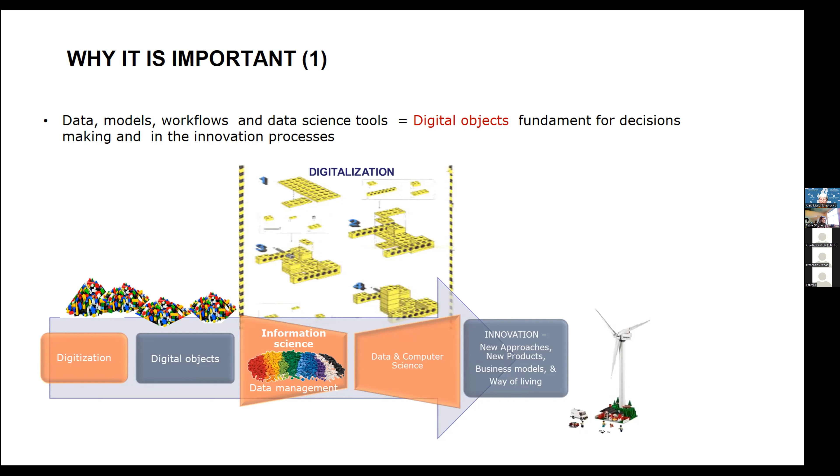This is important at two levels, both organization level and project level, because it's not only for the community, it's also for the organization. If the organization has data that a researcher keeps on his own computer, or data kept safe because we're afraid someone can steal it, that data will never be visible. So this is a really important link in distributed data. Cataloging distributed data is really important to make the organization and researcher visible, to make internal efficiency, and also so that management can reach the data easily to make informed decisions.

At the inter-organization level, it helps a project develop and reach its goal, to join forces and co-create solutions. The last important thing is that we have data owners and data users, and this catalog connects them. The data owner will catalog the data, and the data user can retrieve information about it. This way you don't have to move data everywhere - the data stays there and can be searched, and if someone is interested they will ask permission.

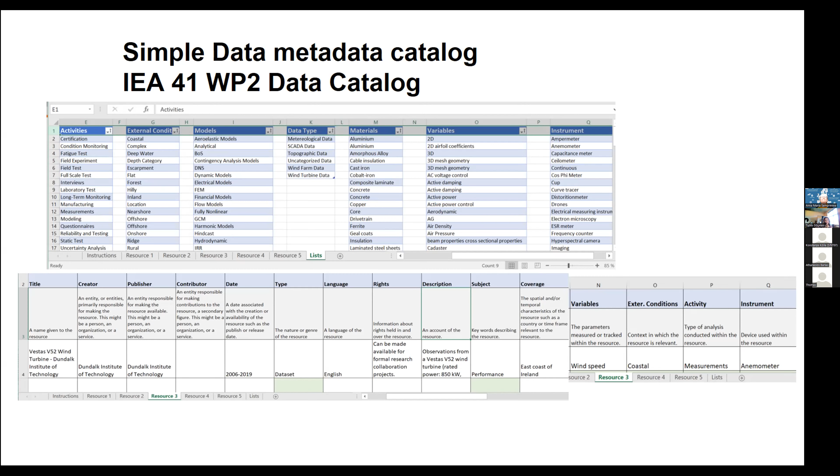This is the structure: when we make a catalog with SESAM, the catalog will have some data sets below, and the data set will have the distribution list - information about the format, and eventually the link to the data. So this is an example of what we can catalog.

Then there is the final piece, the European Energy Research Alliance data. It's a project thought about making the catalog under ShareWind, where the EERA data catalog will have the ShareWind catalog and the ShareSun catalog. This one is the catalog for the sun, for renewable solar energy, and we'll have other renewable energy catalogs. It's a way for the EERA to offer a service to its associates to try to find the data available under EERA.

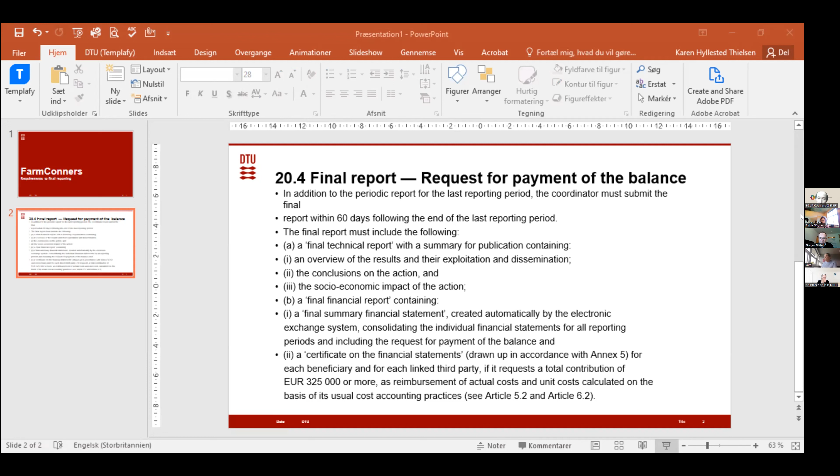The grant agreement said 60 days, but maybe... Yes, you have 60 days to do the reporting, both technical and financial. And we need the system to open for that. And the financial reporting you certainly cannot do before this review, because that is done after the review, after your final travels and costs and so on. So okay.

So Karen, the final financial reporting will be after April then? Yes, it will. But I think it's a good idea to have a conversation with the project officer about how to deal with it for the final review. I take it you're going to do your presentations as you do with these reviews and inform on the results, and that would be the material for the final report.

Okay, that sounds easy. It's a bit more time than we thought. All right. Good, good. Thank you so much, Karen. You're welcome. If you have any questions, just call me. Thank you, have a nice afternoon. You too, thanks a lot. Bye bye.

Okay, that brings us to the very last item on the agenda, which is any other business. So does anyone have any questions they want to raise? Any comments?